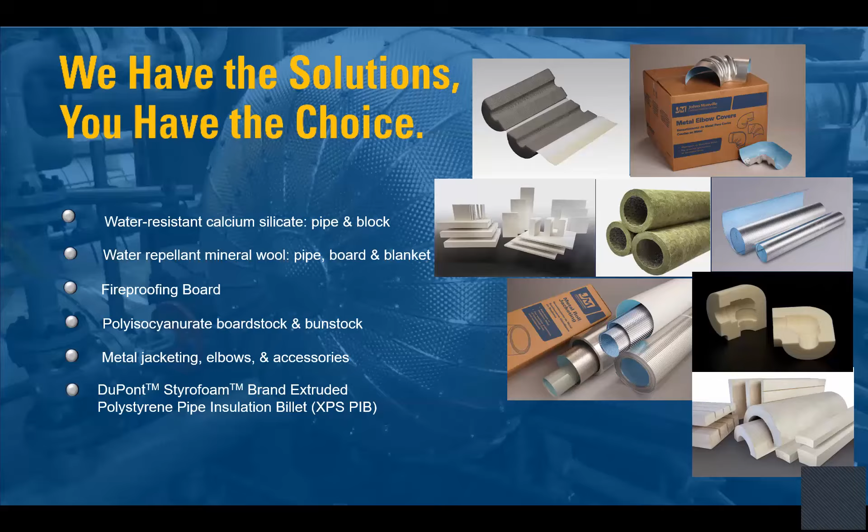So I will start the presentation right from here. At Johns Manville, we've got a multitude of insulation materials and accessories that are focused on the industrial insulation market. We're going to talk about a lot of these products as we get into the presentation today, but you can see there's a multitude of materials we offer.

And our goal is to be as big of a full line supplier to you as we possibly can. So if you look at this slide, on the left-hand column, the products are listed, and they're generic products applicable to the industrial insulation market. Johns Manville has 7 out of, I think it's 10, of them listed there that we offer to the market. So we aim to be as big of a full line supplier as we can.

Some people will ask, well, how come you just don't have calcium silicate? And the answer is, look, there is no silver bullet here. Every product has a place where it performs better in certain conditions than some of the other ones, and that's why we want to have as many as possible.

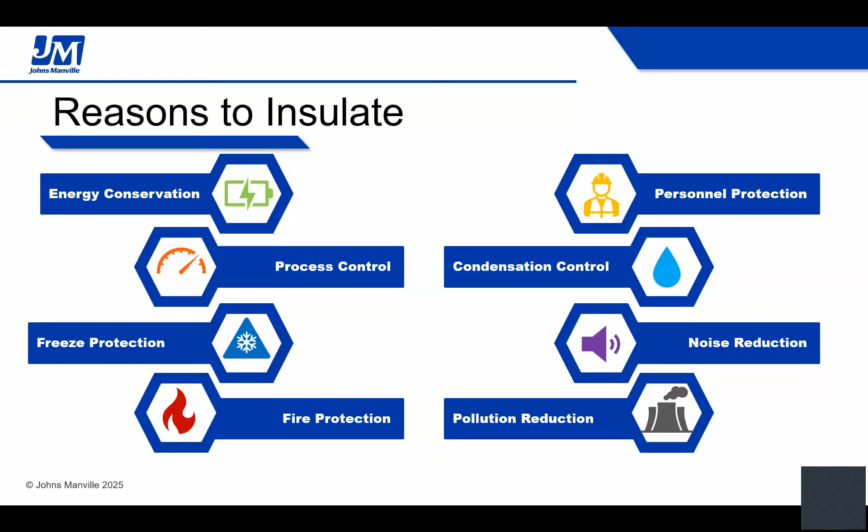So they've got to maintain tight control of their boilers and the operating temperatures to generate the products they want. That's the primary reason to insulate. A secondary one is personnel protection, and the others follow along behind it, with sustainability being a pretty close third, which is pollution reduction and energy conservation.

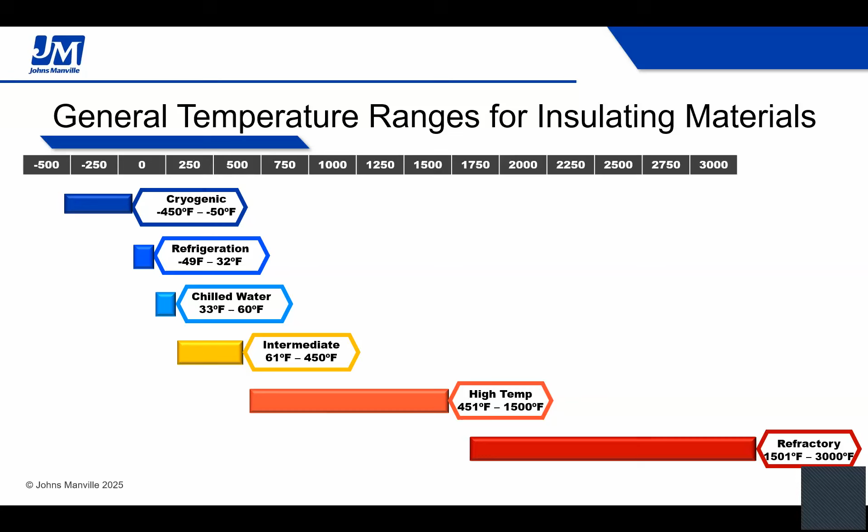This is a chart that I got out of the MICA manual. A lot of times in the business we talk about, well, these are high temperature products, this is chilled water, this is cryo. So the question is, what temperatures are we talking about here? This is a nice summary that I got out of the MICA manual, and what we're going to be talking about today is pretty much everything on here except for the refractory materials. Johns Manville's not in the refractory business.

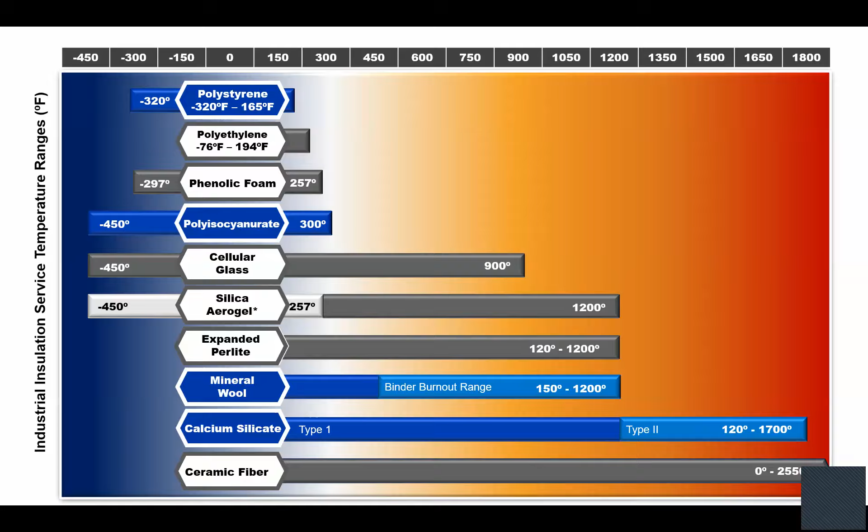This is a similar chart to that last one, except these list the products I had on one of the initial slides. Everything here in blue—polystyrene, polyisocyanurate, mineral wool, and calcium silicate—are products that JM offers. You see here the temperature ranges for all the materials. There's a lot of overlap, and one reason is some products are better suited for certain applications than others, so that's why they will all overlap. You just have to pick the best ones based on your conditions.

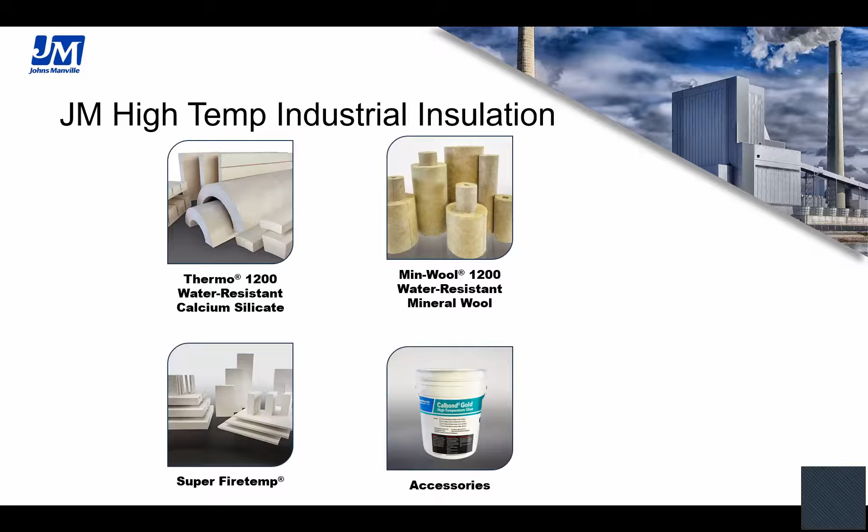So these are generally the high temperature products we have at Johns Manville. We have a calcium silicate, which is Thermo 1200, our mineral wool pipe and board products, some high temperature boards, which are Super Firetemp, and then we've got a couple of accessories that go along with the high temperature products.

We're going to talk a lot today about water resistance and hydrophobicity. So I do want to put just a brief slide here on what we're talking about and why. Corrosion under insulation is a huge issue in the industrial insulation market.

There's a lot of estimates of what it costs facilities per year, and one study found it costs $84 million annually per facility. That's on average—some are bigger with a bigger cost, and some are smaller, but on average CUI consumes about 40 to 60% of the maintenance costs.

And as a result, folks' main efforts when they design systems are keeping water out of the system. Over time, that's very hard to do—there will be some water incursion. So the next step is to make the insulation either hydrophobic or water resistant.

And what does that mean? Well, hydrophobic is kind of like water going off a duck's back, and certain insulations are hydrophobic—cellular glass, expanded perlite, and silica aerogel products are in that classification. Other materials are water resistant, which isn't hydrophobic but also isn't hygroscopic. They do resist and repel water up to a degree. Our calcium silicate and mineral wool that we offer are water resistant. But pretty much all the industrial insulation materials these days are either water resistant or hydrophobic.

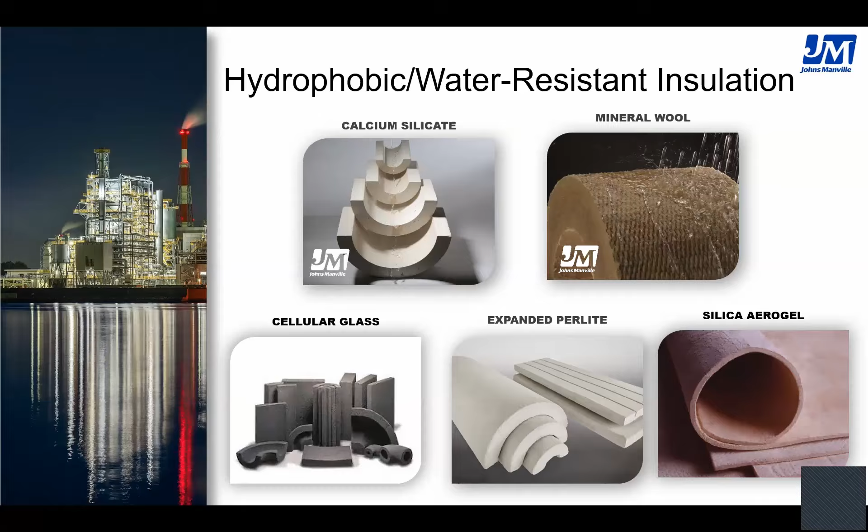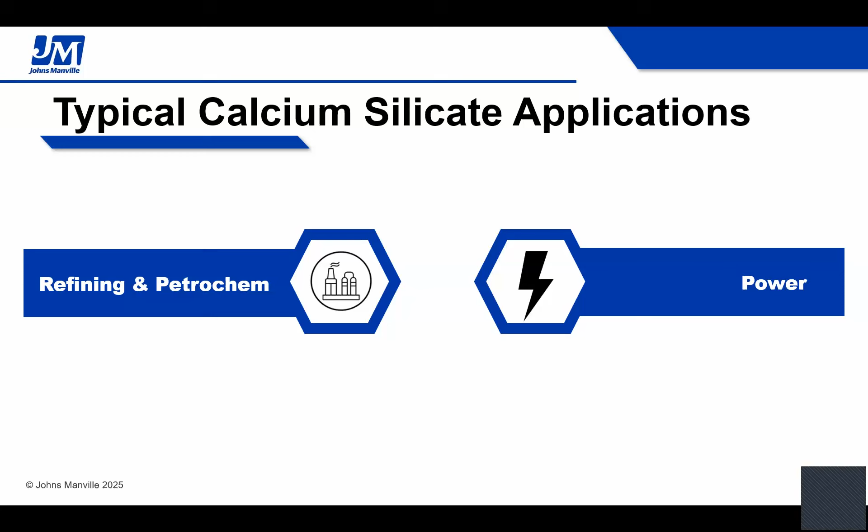So let's talk about the insulations, and we'll start with calcium silicate. Johns Manville's brand is Thermo 1200. Typical applications are refining, petrochemical, and power—our biggest markets—and we also do some in pulp and paper and a few other associated industries, but refining, petrochem, and power are our major markets.

The benefits of Thermo 1200 and calcium silicate in general: it's got a pretty decent K factor, and we're going to talk about K factors a little bit—that's the insulation value. Those of you who know more about fiberglasses or mineral wools know their thermal conductivity, or K factor, is less than .34—it might be .22, .23—and they're better insulators.

But again, we're talking at low temperatures. So calcium silicate is a much better insulator than some of those other materials I just mentioned at high temperatures, which is the application for it anyway.

Our Thermo 1200 has a corrosion inhibitor contained in the material—I'll talk about that a little bit shortly. It is water resistant. Its greatest strength, I've always said, is its compressive strength, and that's pretty much what allows it to be in applications that are—I know of some that are more than 25 years old. The maximum service temperature of all our high temperature insulations is 1200 degrees.

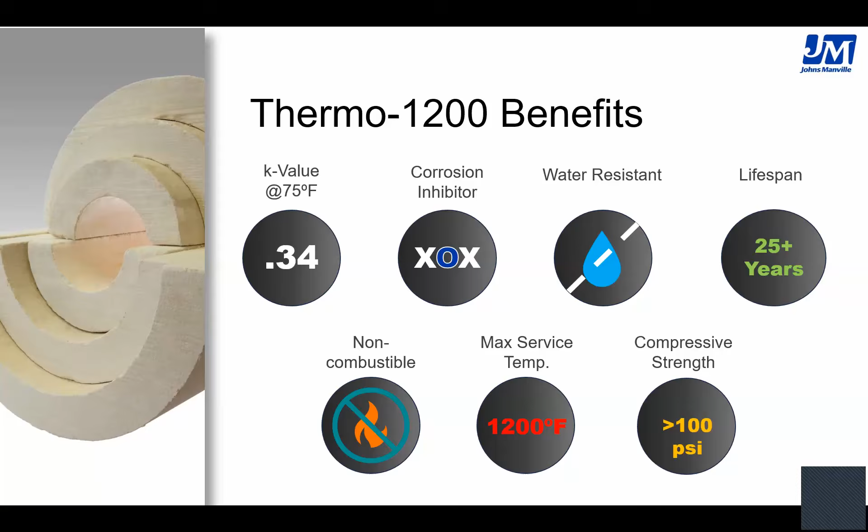So let's talk about water resistance. In 2017, Johns Manville made our calcium silicate Thermo 1200 water resistant. And what does that mean? Well, compared to before we made it water resistant, look at this chart.

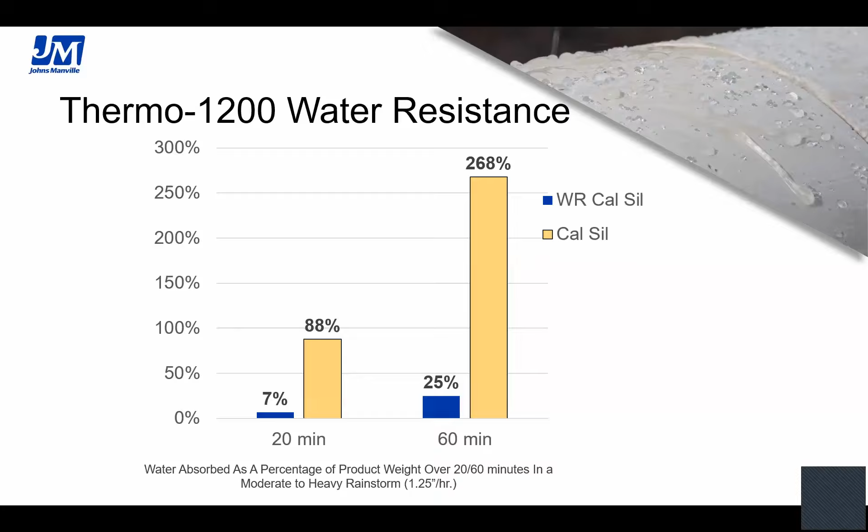The yellow or gold bar is our old one—that's Thermo-1200—and it was not water resistant. You can see in a 20-minute rainstorm, it would absorb as a percentage of product weight 88% of that moisture, versus now that we've made it water resistant, in a 20-minute rainstorm it would absorb 7%. So the old stuff absorbed water very easily. Water resistance became important for CUI reasons, and also contractors like the fact that it's water resistant because it gives them more time to install the jacketing.

However, sometimes when that vessel gets really big, those V's don't close. So what do we do? We've got 3 alternatives for a tighter fit on large diameter vessels: what we call beveled lags, curved segments, and curved radius block.

I'm going to talk about curved segs and curved radius block first. Those are cut to fit the actual diameter or circumference of whether it's a vessel or a large diameter pipe, and the sides are angled to fit tightly against each other, so it does away with those V's that might not close. We have 2 versions, one's 6 inches wide, one's 12. They're the same product, just one's wider than the other, which results in less labor.

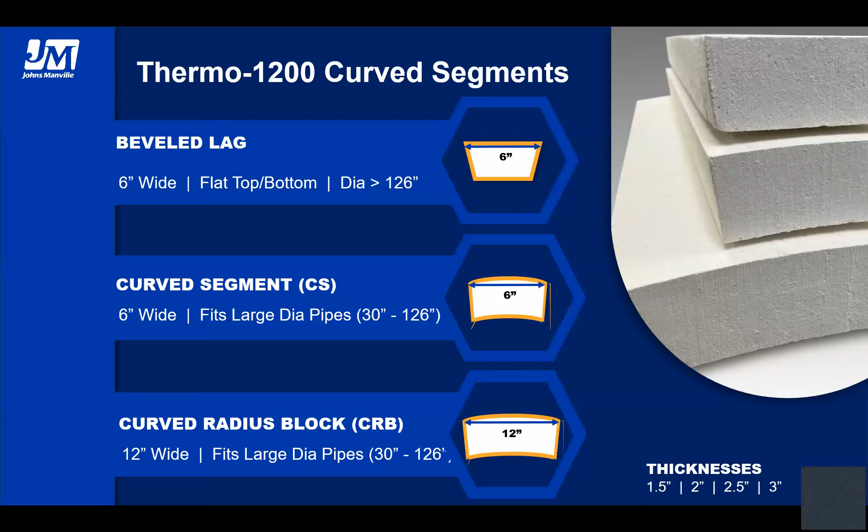Going to bevel lags, at some point that vessel surface might get so large of a diameter that you don't need to cut a curve in the block. So we offer beveled lags where there's an angle cut on the sides, but the flat part on the inside fits very tightly against the vessel because the diameter is so big. You end up with a nice tight fit with either one of these options, fitting snugly to the vessel surface as well as closing up the joints very well.

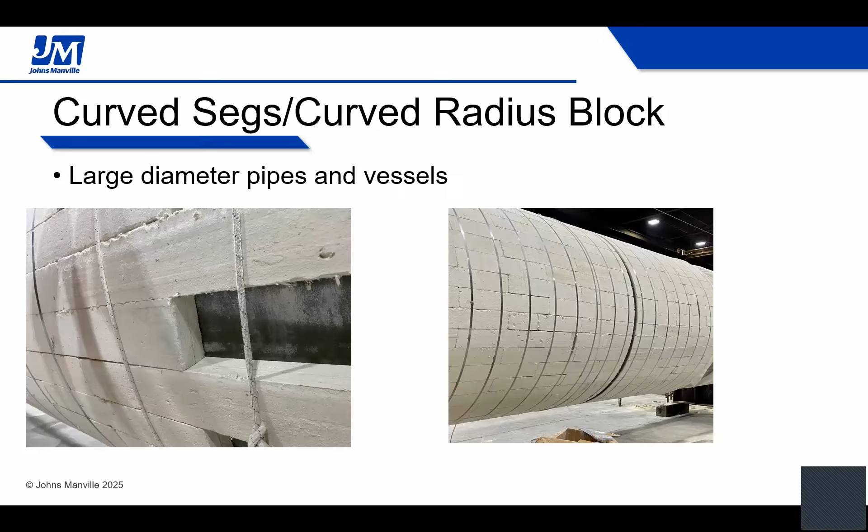A couple things to think about with calcium silicate: there are various options and you can select a lot of different materials, but it's really up to the owner or the specifier to qualify the materials. That means meeting the ASTM requirements and other testing requirements that the owner might have prior to selecting the material.

We also have a corrosion inhibitor in the insulation calcium silicate we make today. That corrosion inhibitor was put in in 2002. I'll talk a little bit about that next, but just be aware that there is a corrosion inhibitor that actually works in our product.

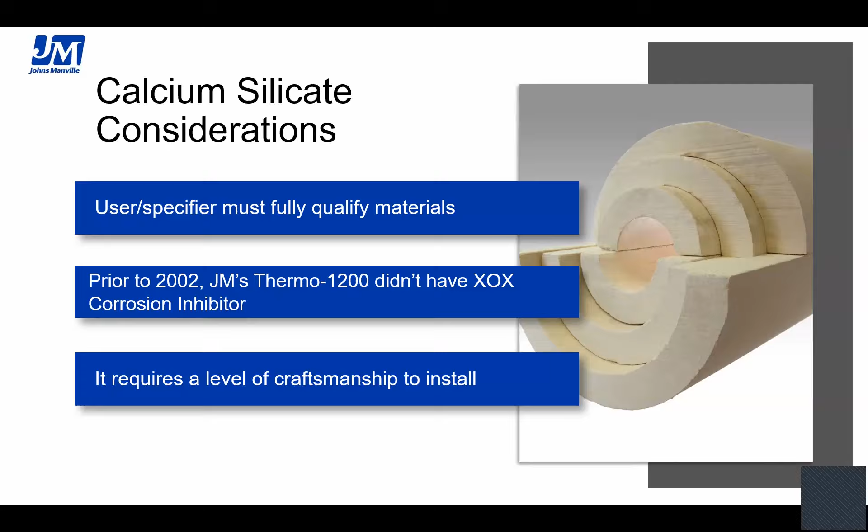CalSil requires a higher level of craftsmanship to install. It's a cementitious product, so cuts have to be pretty accurate. It's easier with mineral wool because it's a fibrous product, so if the cut's not accurate, you can pretty much push it up against the nozzle or the valve stem and band it on, and you're good to go. With calcium silicate, you can't do that because it's cementitious, so it requires a little more skill level on the part of the contractor.

Getting back to that corrosion inhibitor, ours is called XOX. You see it quite often today that pipes are painted or coated before insulation is applied, and one of the reasons folks do that is to keep moisture off the surface of the pipe. When moisture contacts the surface is when corrosion can happen. The XOX actually provides a protective coating to the pipe, similar to and performing the same way as painting the pipe or putting some other coating on it, but this is contained in the material itself.

95% of our chemistry includes a blend of at least 4 different corrosion inhibiting ions. It keeps the pH level around 10, well above the acidic level where corrosion can occur at less than 7. Those corrosion inhibiting properties are there for the life of the system; they don't leach out over time. They're actually activated when water is present, so it's a water-activated solution. If there's no water there, you don't need corrosion inhibitors, but once water enters the system, the chemistry coats the pipe as the water gets to it, keeping the water off the pipe.

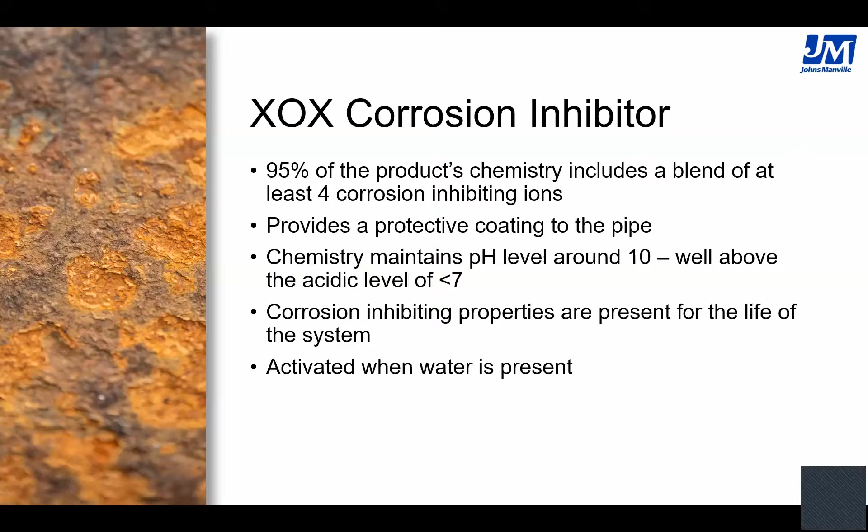Another term for the protective coating is a buffering effect, and it maintains the pH at a high enough level to help inhibit the corrosion.

We also have some heavier duty calcium silicate boards. Our brand names are Super CalTemp Gold 1700 and Super Firetemp. The 1700 degree block is produced in the forms you see here, flat block and also scored, just like our regular Thermo-1200 calcium silicate, except it's good for applications up to 1700 degrees Fahrenheit. We'll talk about where this is used on the next slide, but I also want to mention Super Firetemp, which are higher density boards used for pipe saddles, pipe supports, and various other applications, with service temperatures up to 1800 degrees Fahrenheit.

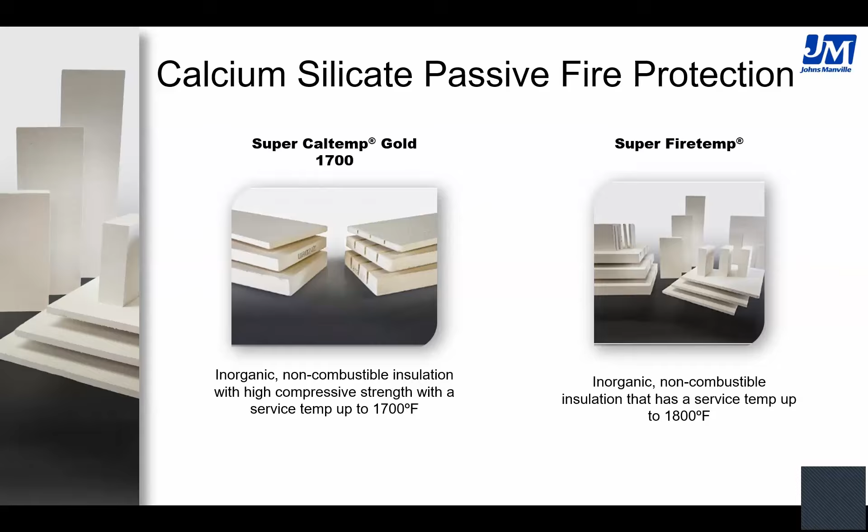Primary applications for both materials, the Super CalTemp and the Fire Temp, is they provide a 2-hour rating for UL 1709 as passive fire protection. For those unfamiliar with 1709, that's a hydrocarbon pool fire where the temperature goes from 0 to 2000 degrees in 5 minutes, and the insulation has to perform for 2 hours or 120 minutes. These are primary applications for both the Super CalTemp Gold and Super Firetemp products.

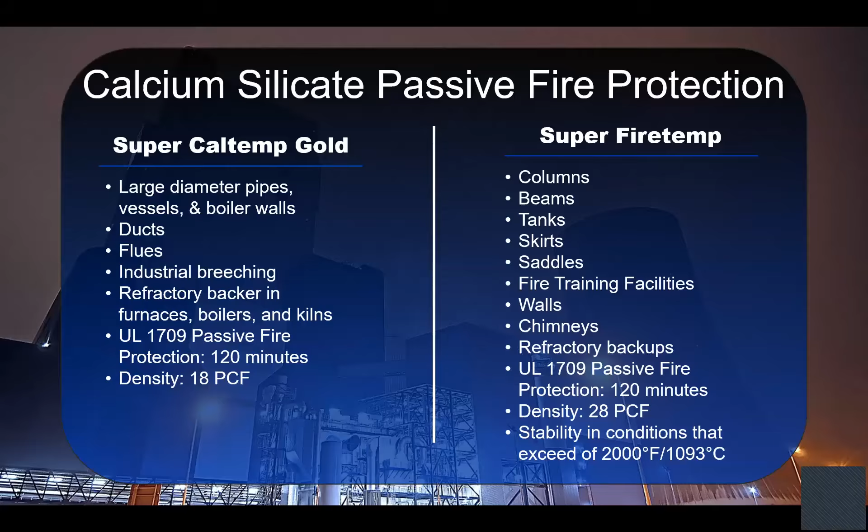One application we're seeing more of these days with Super Firetemp is fire training facilities, due to its fire protective properties. We published a technical bulletin last month about that application. This is a burn building where you can see the walls and ceiling are lined with our Super Firetemp board, used to train firefighters.

They'll throw a couch, a bed, whatever it is in there to simulate a room, then set it on fire, and send the fire department in to put the fire out. It's designed to be reused. There are instances where panels on the walls haven't been replaced for 7 to 10 years through multiple training classes.

Now I want to move to mineral wool, which is a fibrous product. Some of the benefits - notice the K factor. The K value at 75 degrees for CalSil was 0.34, this is 0.22. K values I look at like golf scores, the lower the better. So based on this, at certain temperatures, mineral wool is going to be a much better insulator than calcium silicate.

The other big advantage is acoustics, and we see a lot of specifications calling for mineral wool for insulation and acoustics. It's also easier to install, like I mentioned with CalSil, because it's a fibrous product. It's one of the lower cost options, labor and materials, that you can find on the market today.

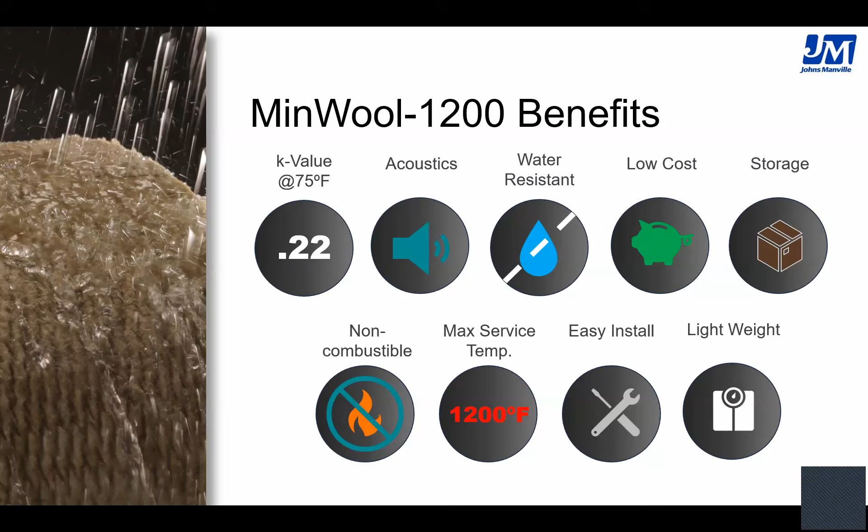In addition to pipe insulation, we make boards. Our industrial boards range from densities of 4 pounds up to 10 pounds per cubic foot, and those boards are rigid, primarily used on flat ducts and large diameter vessels. But we also make the same type of boards, same densities, in a flexible form which we call batts - they wrap easier than a rigid board around cylindrical ducts, turbines, and larger diameter vessels.

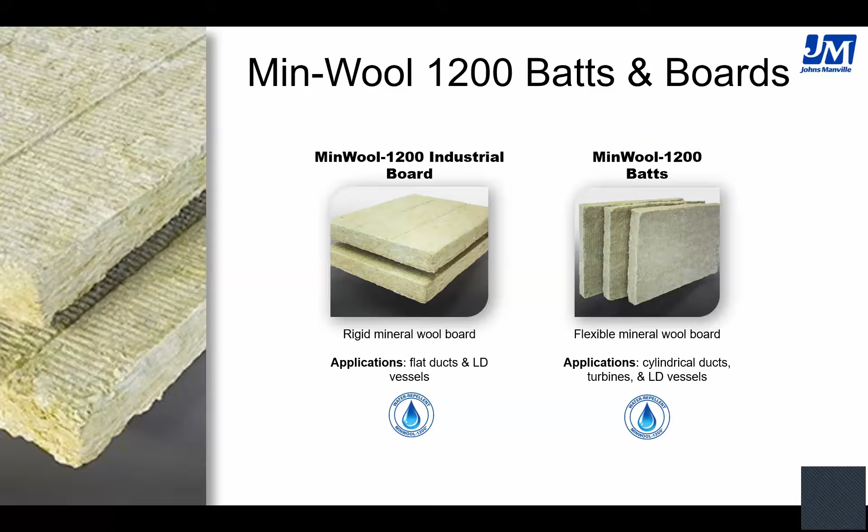All of our mineral wool insulations, whether pipe or board materials, are water repellent.

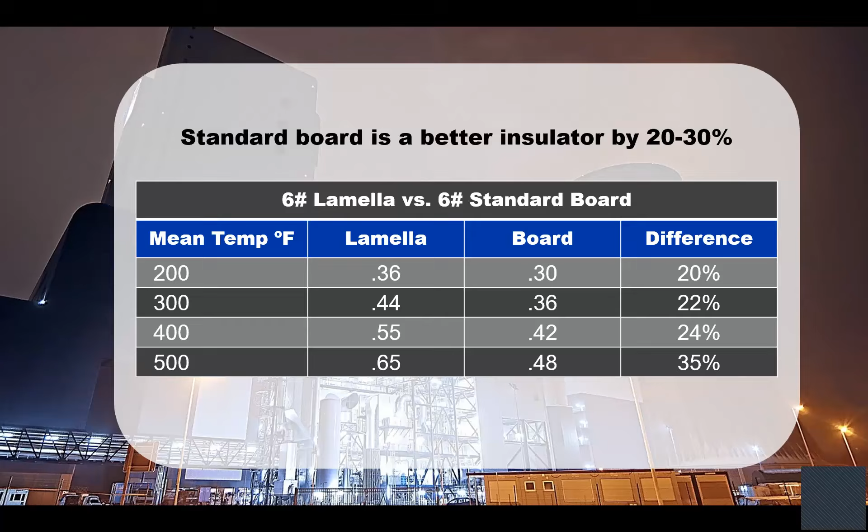The interesting thing is both of these products might be made out of 6-pound density material, but simply due to fiber orientation, the thermal conductivity, the K factor, the insulation value - however you want to look at it - is different, primarily due to the orientation of the fibers. Fibers that are parallel to the surface insulate better, providing a more difficult path for heat to move through the material versus perpendicularly set fibers.

So with mineral wool, you hear a lot about binder burnout. What's that all about? Well, binder is an additive that holds the fibers together, it gives them their loft. In mineral wool and other fibrous materials, that binder is an organic material.

It begins to oxidize or burn out at about 450 degrees Fahrenheit. You can see in the picture at the top, the gray part is where the binder is oxidized, the brown part is where it's beginning to oxidize, and on the surface where it's cooler, the binder's still fully there and intact, doing what it's supposed to do. The good news is the binder doesn't impact its insulation value at all.

But without the binder, the compressive strength is compromised. Again, the binder is what holds the fibers together, so if the binder's not there, the fibers are still there unless you've got a bunch of vibration, which will cause the fibers to move and settle at the bottom. Gravity always wins.

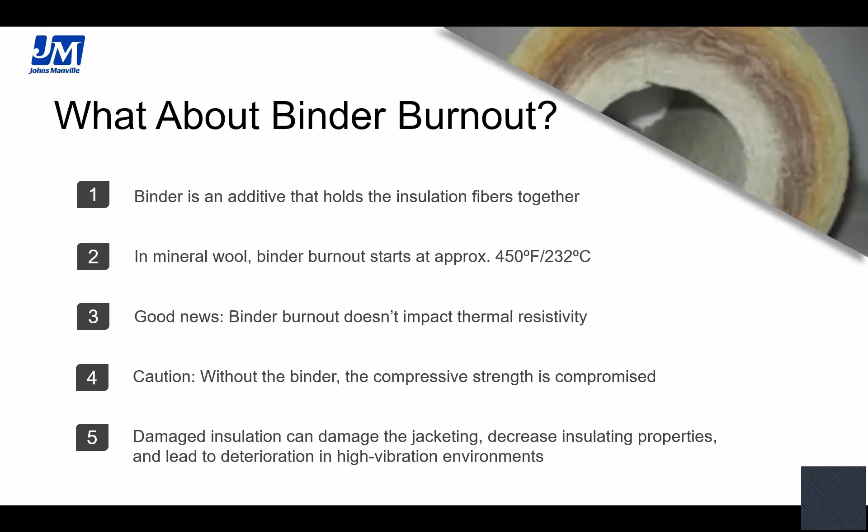Mineral wool is a softer product. It's spongy, and without the binder, it's even more spongy. So it's more likely to be damaged if it's not treated carefully. When you damage it, the compressive strength suffers. So now that 2 inches might now be 1.5 inches, and your thermal conductivities are different. Your insulation value is different, and not in a good way.

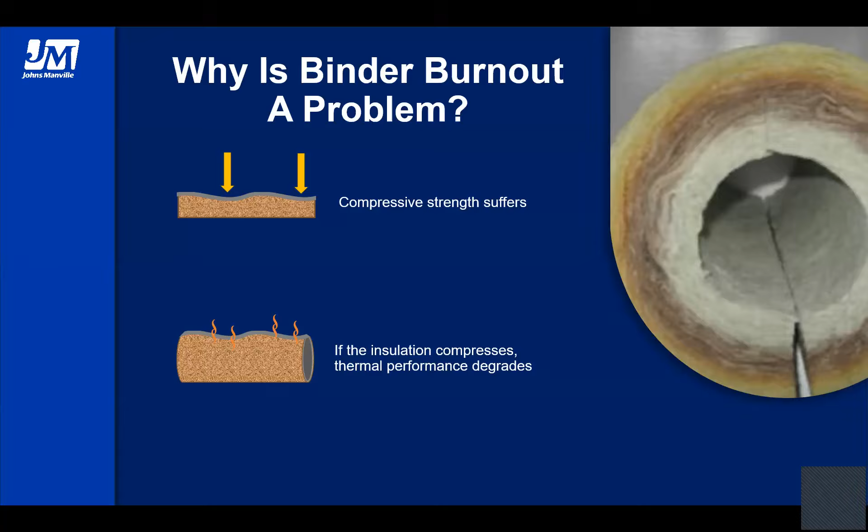So some things to consider when you're looking at choosing mineral wool: it does have a lower compressive strength. So if there's physical abuse, people are going to be walking on the insulation, which you're not supposed to do, but we all know it happens. A higher compressive strength like calcium silicate would be the better choice. The K factor is pretty low, but above temperatures of 500 degrees Fahrenheit, calcium silicate actually becomes a better insulator. The K value curves cross.

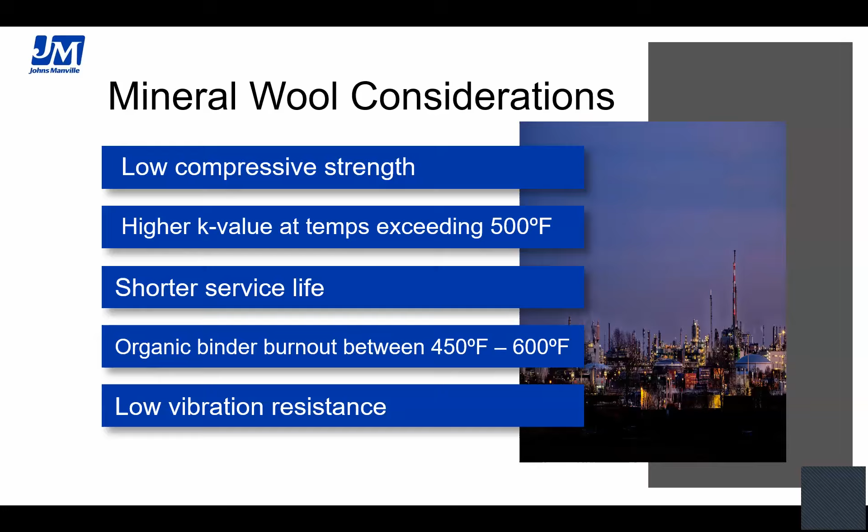Mineral wool has a shorter service life in general, just due to the low compressive strength. Any damage to the jackets will now allow water to get into the system, and now you have the higher potential of corrosion. And just fibrous products in general have a low vibration resistance over time.

Gravity also always wins. And finally, we offer two different high temperature accessories. One of them is the CalCoat 127. It comes in 40-pound bags. You mix it with water and trowel it onto the pipe insulation where there is a chip, a damage, or the seams don't meet exactly right. You fill in voids with this product.

In addition, we have Calbon Gold, which is a sodium silicate-based adhesive, used to glue broken pieces together, but also for gluing the miters that are cut for elbows to each other and other large sections or special shapes. And it dries very hard, so if you drip it on the floor when you're doing this and you don't clean it up, you're going to have to chip it up later.

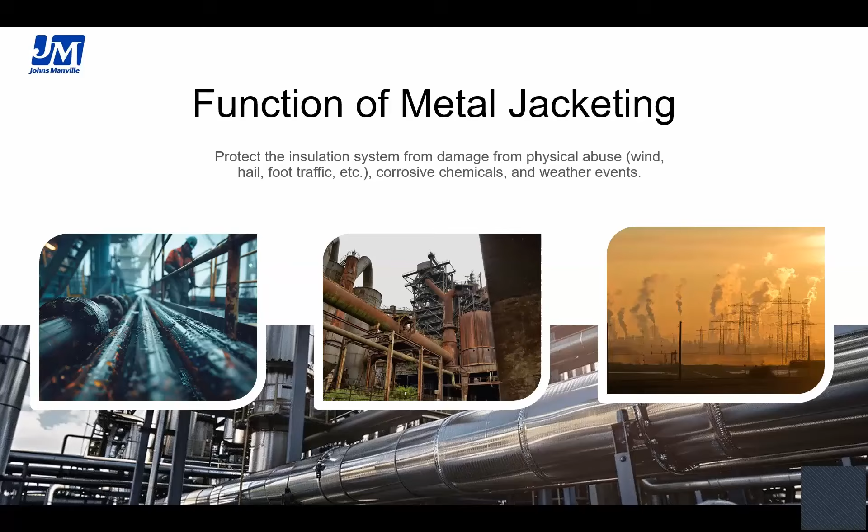I think we have a picture somewhere of a mama bear and her cubs choosing to walk on an oil pipe instead of on the ground for easier walking. So it's not a matter of if your pipe is going to get damaged, it's more of a matter of when, unfortunately. The secondary function of metal jacketing is to reduce water infiltration into your system.

To help facilitate this, the longitudinal joints on horizontal pipe need to be located at about the 3 or 9 position on the pipe. And all joints on pipe and tank insulation should be oriented to either naturally shed water or face away from prevailing winds. Another step to keep out liquid water is to seal the metal jacketing joints with flashing sealant applied inside or on the outer lip of the joints.

This is a little controversial. Some people think it helps keep water out of the system, while some people think that it prevents or slows the evaporation of water that is already inside the system. There's not really one that's proven right scientifically. Our opinion at JM is that sealing of metal jacketing joints is probably beneficial. We recommend doing this, but it is a mild recommendation and not something that absolutely must be done. The ultimate decision on this is up to the specifier of the insulation system.

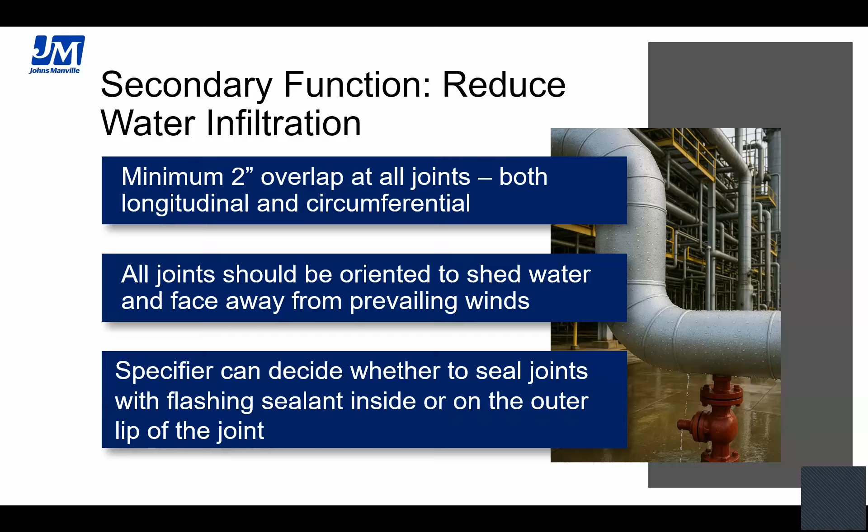Outside of North America, there's a lot of coated steel used in that market, such as Galvalume, galvanized and aluminized steel. But these are really rare in North America. In our geography, aluminum is used most of the time for metal jacketing. It is cheaper, easier to handle, install, and fabricate, and it's safer since the edges aren't as sharp as with stainless steel.

We strongly recommend that all metal jacketing have a 3-layer, 3 mil thick factory heat laminated polyfilm moisture barrier on the interior surface. That helps prevent corrosion on the hidden interior surface of the metal jacketing. I'll get into that in a few slides.

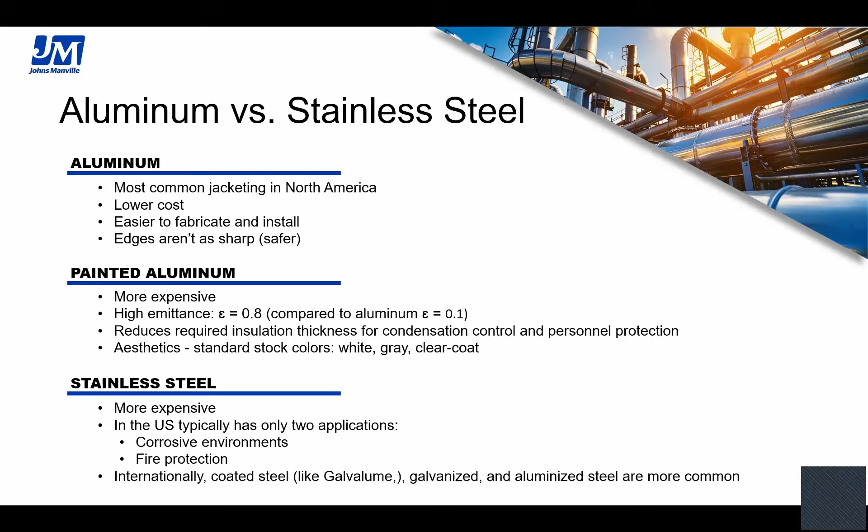Just to note, the aluminum ASTM is C1729 and stainless steel is ASTM C1767. Those are differentiated based on rigid versus non-rigid insulations.

So here is our metal jacketing accessories, all shown above. We do have crossflow jacketing, which I will get into. We have a series of other jacketing facers, such as stainless steel, aluminum, and painted aluminum, and elbow fittings.

We note that our aluminum elbows have that polyfilm moisture barrier applied on the interior surface, where our stainless steel elbows do not. It's not a matter of if we can, it's just not a necessary need in the market.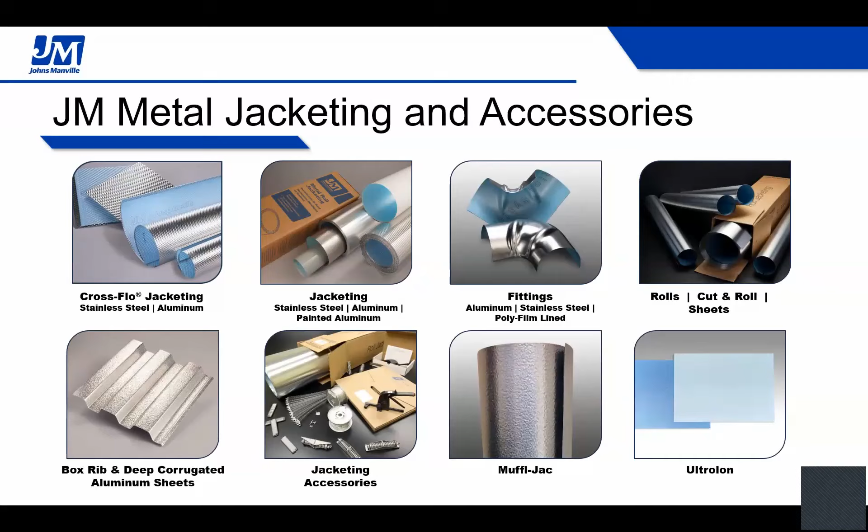And then we have rolls that are both available in sheets and cut and roll. We have corrugated metal accessories to go along with those, some acoustical products, as well as others available online.

So let's get into the topic of moisture barriers that I just mentioned. We have a polyfilm moisture barrier factory heat laminated to the inside surface of our metal. It's to reduce the likelihood of corrosion, so it would actually be more accurately called a corrosion barrier, but we've all settled on the name moisture barrier, so that's what we're going to call it.

Vapor retarders used on the outside of the insulation are sometimes improperly called moisture barriers, but we don't recommend using that. This inhibits corrosion when water or water vapor can enter the insulation and exist between the insulation and the jacketing. In hot applications it's between the vapor retarder and the jacketing, and in cold applications the water can cause pitting or crevice corrosion on that interior surface of both aluminum and stainless steel jacketing. There's also another type of corrosion called galvanic, which you also want to prevent.

For all these reasons, we strongly recommend the use of polyfilm moisture barrier, or shortened to PFMB, on our metal jacketing where it is available. It is not a proprietary product. A lot of manufacturers use this; it just comes in different colors, etc.

All right, so here's the performance of 3 different types of moisture barriers on some of the key properties and testings that have been performed in the past. The 3 types of moisture barrier are paint, polykraft, and polyfilm.

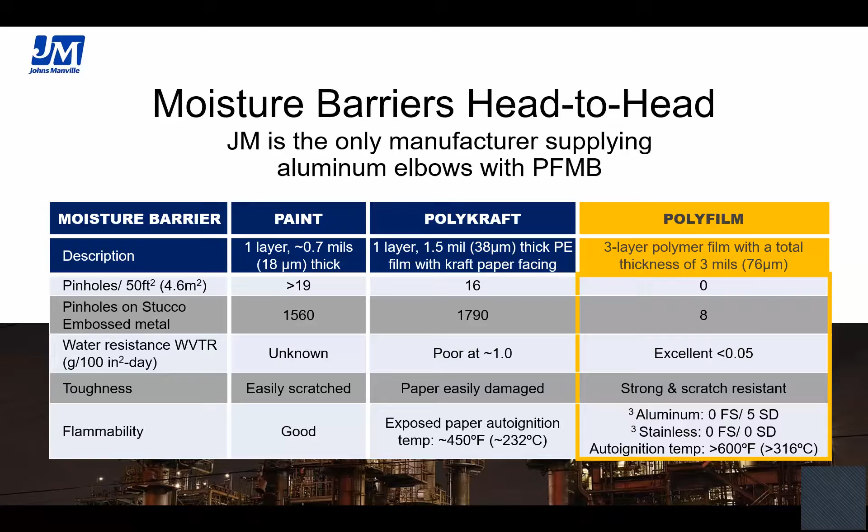All right, so now we're going to move into our pressed metal elbows. Metal elbows are the jacketing portion that goes over the insulated elbows in piping systems. We produce these jacketing elbows in 2 metals, aluminum and stainless steel.

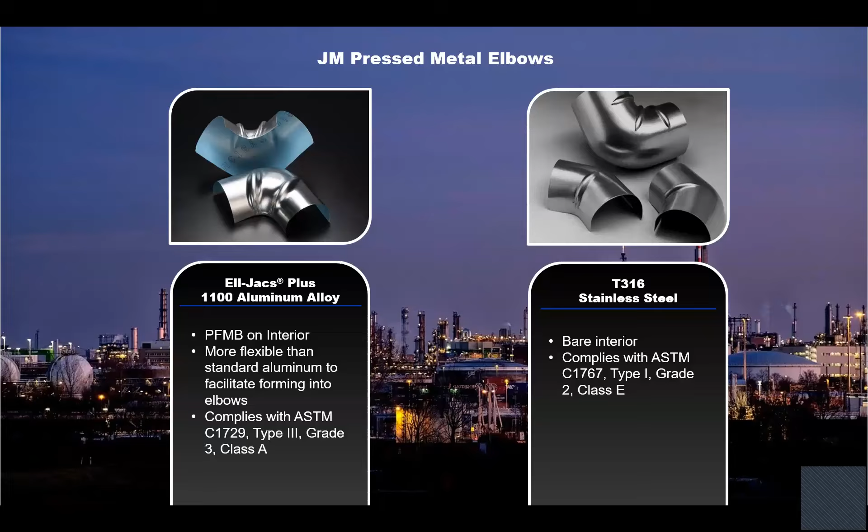Our aluminum comes in 1100 alloy with that PFMB on the interior. Our stainless steel comes in T316 alloy, which offers a higher corrosion resistance, and they have the bare interior and exterior. Both of these comply with their associated ASTM requirements.

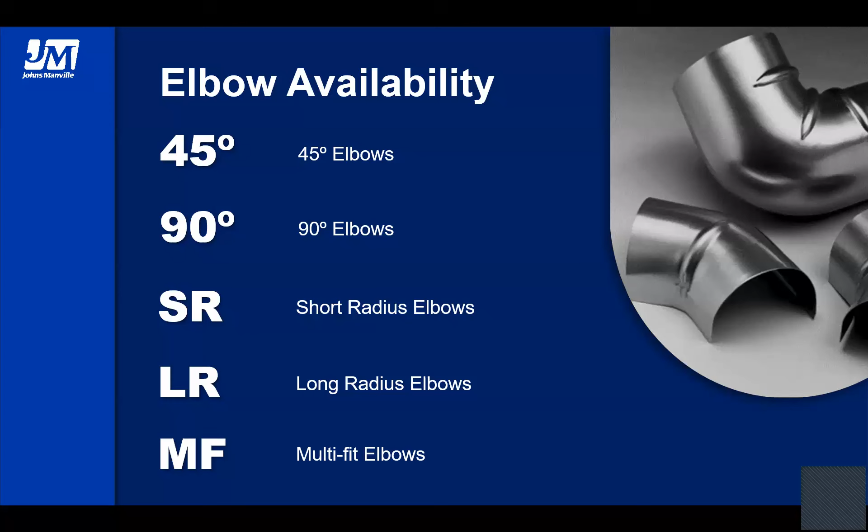This is our slide simply showing the availability of the elbows we offer. We offer in 45 and 90 degrees, short and long radius, and what we call multi-fit.

Our pressed metal elbows are designed to fit over a 2-piece preformed elbow installation that's sized to comply with ASTM C450 and C585. The target overlap at the longitudinal joint of the elbows is 5/8 inches at each of the 2 joints, and it can go as low as 5/16, but we don't necessarily recommend allowing the overlap to go any lower than this. The target for the butt joint overlap with adjacent straight pipe jacketing is 5/8 inches.

The pressed metal elbows are secured with screws, rivets, or bands, but only on cold pipe. Bands are the only item that should be used, I'll explain that again later. When you have screws and rivets on cold insulation, you're going to rupture that vapor barrier underneath and render it obsolete immediately. We do have a number of documents on the installation of our pressed metal elbows available online.

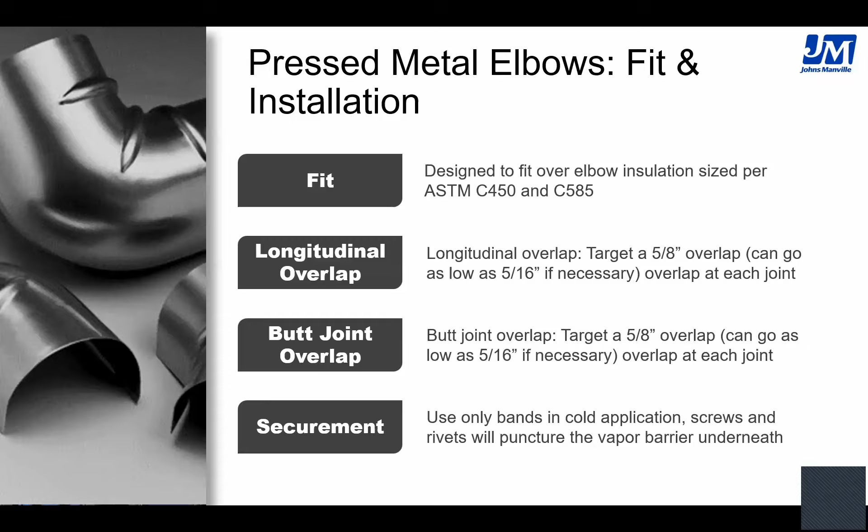So let's talk about sizing. Our pressed metal elbow jacketing sizes are identified by a numerical designation from 1 to 56, and then Q1 to Q9 for our larger 4-piece elbows, which we call quads. The numbers are specific to each elbow type and metal type, so like a 45 aluminum, a 90 stainless, and so forth.

These numbers don't indicate size though. They are literally based off of the models that we pressed the pipes on, or the molds. So they're just a numerical name assignment to each elbow. The larger numbered elbows are usually, but not always, a larger size. For example, an 18 aluminum 90 is larger than a 10, and a 44 is larger than a 39. But there are exceptions. The person selecting the elbows must always refer to the sizing tables. I'll show you an example of this here.

So what I meant on the previous slide, we're going to show through a visual aid using our 90-degree long radius sizing chart. If the number elbow specified in our table does not fit, it is not correct to simply use a size that is one number larger. In this case, we have a 21, and if that 21 doesn't fit, you're not just going to jump to a 22.

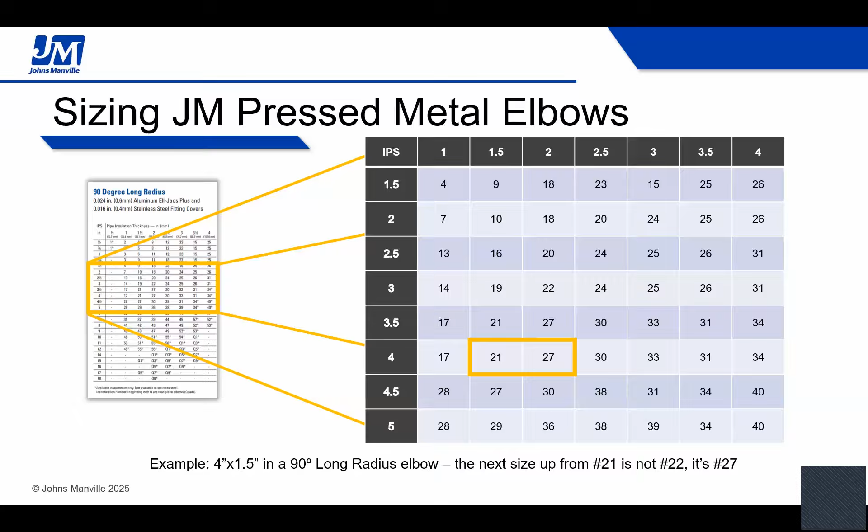Instead, looking at this table, the next larger size will be one cell to the right. So in this case, when our 21 doesn't fit, you're actually going to pick a 27. That throws some people off, but if there's any confusion or questions, our customer service team are experts in doing this, so just give us a call. We do this stuff all the time, so don't sweat it.

Now we're going to move on to our painted aluminum jacketing products. We can provide our aluminum jacketing with paint on the exterior surface. Our stainless steel jacketing is not routinely painted.

The painted aluminum provides 3 benefits. It changes the appearance for aesthetic appearances, and some end users find the product more aesthetically pleasing. It also increases the emittance from 0.1 to 0.5 and 0.8, depending if it's clear paint or pigmented. That is important because essentially emittance reduces the required insulation thickness for condensation control and personnel protection design criteria where jacket surface temperature is critical.

We also offer improved corrosion resistance compared to bare metal. It's still not as corrosion resistant as T304 stainless, but painted aluminum will approach this performance, so it is a step up from bare aluminum.

Here at JM, we offer 2 standard paint colors, white and gray. We do have additional colors based on request. For example, we do have a lot of jobs with Bureau of Land Management where they will want a forest green or a sand color, and that helps those pipes blend into the environment where people don't want the pipes as obvious outside.

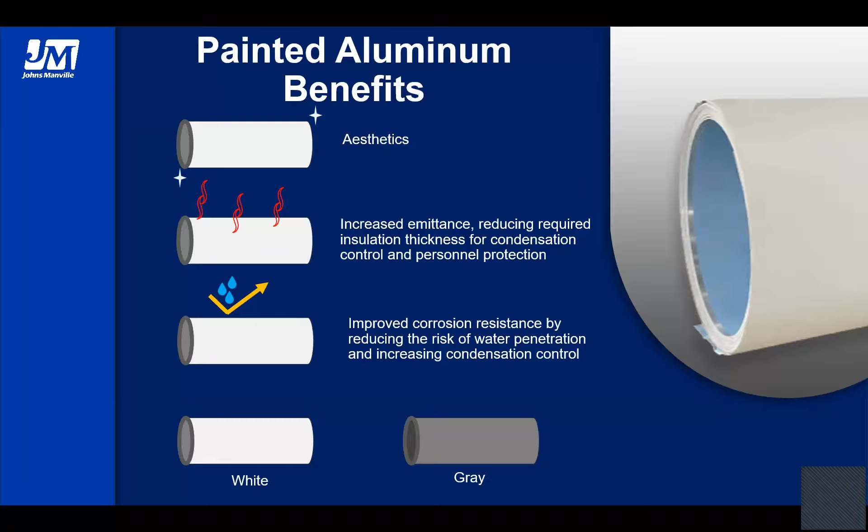Moving right along, we have profiled metal sheets. We offer 2: one is box rib and the other is deep corrugated. Box rib is obviously a steeper, more angled corrugation, and then we have our deep corrugated, which is that more traditional look. The important note on these is you're not going to put these horizontally because water will pool in those ribs and cause corrosion. So these are for vertical application on large tanks and vessels.

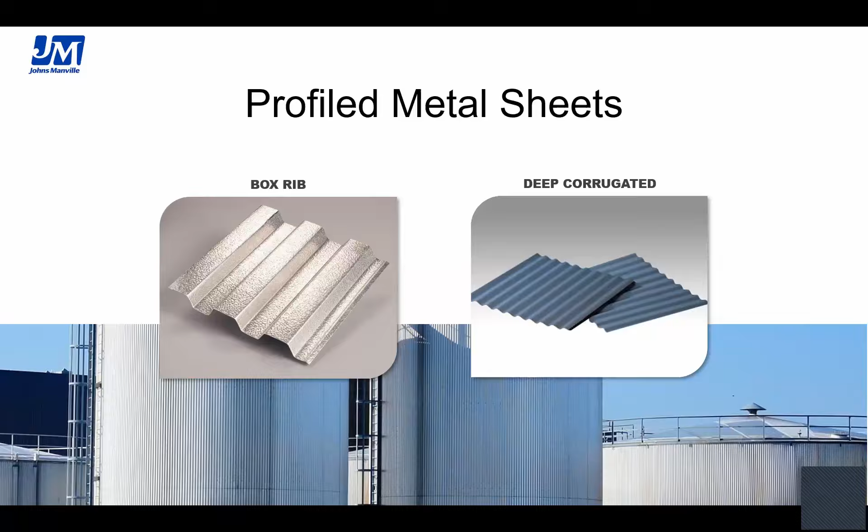For time's sake, I'm not going to go through all of this in detail, but box rib we offer in aluminum and stainless steel, typically in a stucco embossed pattern. Our deep corrugated is offered in smooth, stucco embossed, and painted. It has that PFMB on one surface. Both of these are for vertical cylinders, never horizontal.

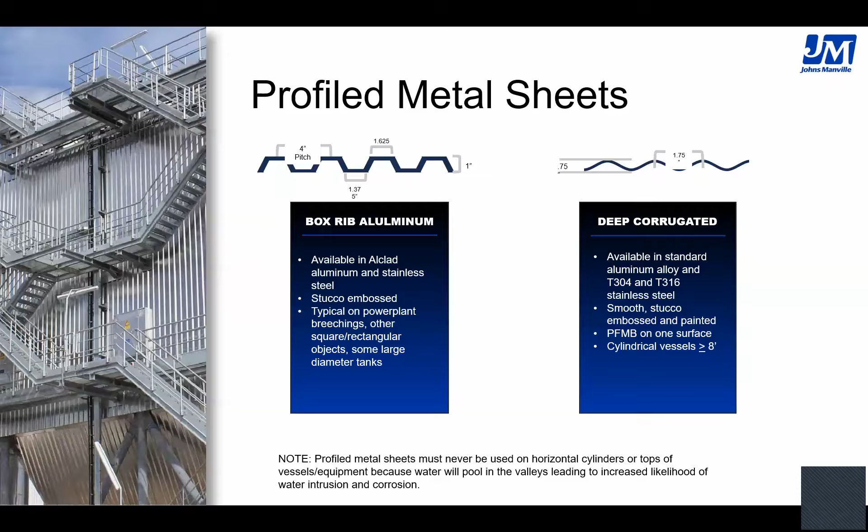The other one is muffle jack, which is an 020 stucco embossed aluminum laminated with that 1 pound mass loaded vinyl. That is protective jacketing and an acoustical benefit in one go. It's installed just like regular metal jacketing and has the same dimensions.

Going into our accessories, we have a myriad of offerings here, both aluminum and stainless steel banding in 2 sizes. We do typically recommend stainless steel banding as aluminum is a little weaker and can snap and break. It is offered in rolls and pre-cut lengths.

We offer a variety of fasteners. Again, on cold applications, only banding should be used to secure the jacketing, not those screws or rivets like I mentioned. We do offer tie wire to secure insulation in place, mostly in hot applications, and springs to help maintain tension on banding around tanks and very large pipe as the tank and insulation system undergo expansion and contraction.

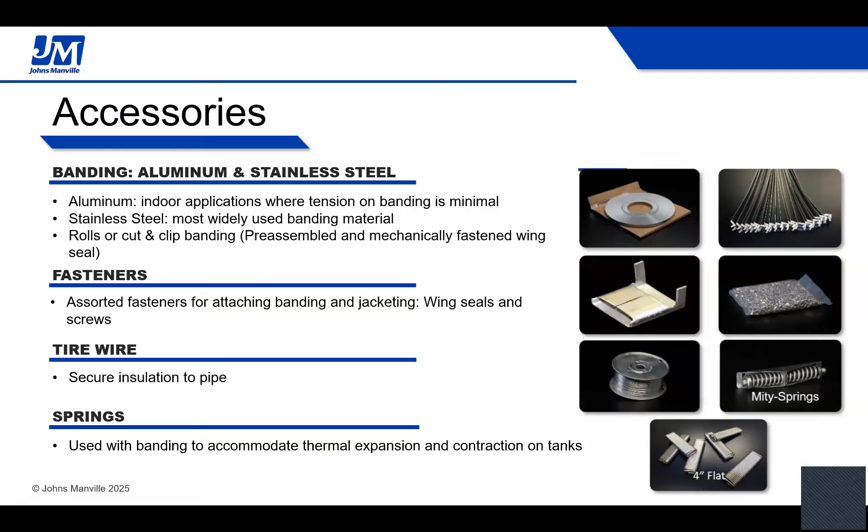So now we're going to get into our most recent innovation. It was launched a few years ago. It's called Cross-Flo metal jacketing. I know I'm going fast—I really appreciate your guys' participation here.

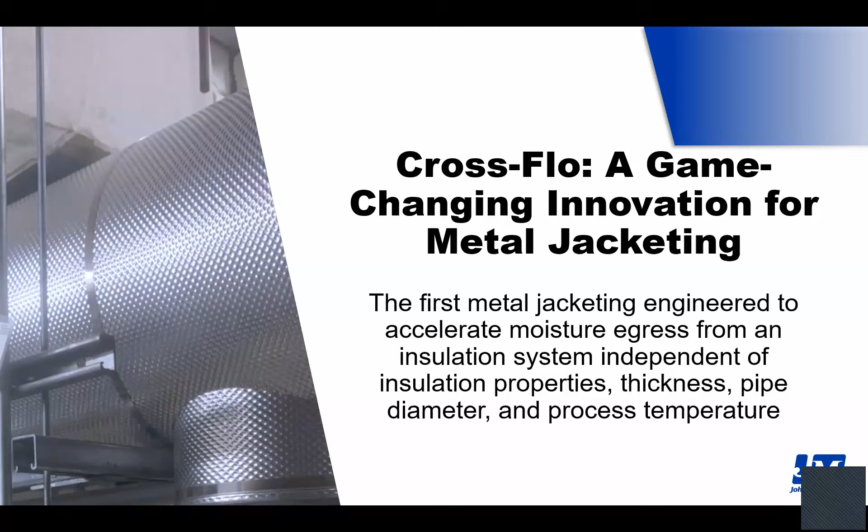So the first metal jacketing is engineered to accelerate moisture egress from an insulation system independent of insulation property, thickness, pipe diameter, and process temperature. That's important for reasons I'll get into right now.

So Jack mentioned CUI, or corrosion under insulation. When you heat up your pipe, you're going to have heat driven from your pipe through your insulation outside. During construction and temporary shutdowns, it might be necessary for insulated equipment to be idle, and when that happens, the pipe system is going to cool down. Moisture can enter the system if it's condensated on the outside, and it can go through if it's not installed properly, traveling through that insulation and sitting on that pipe.

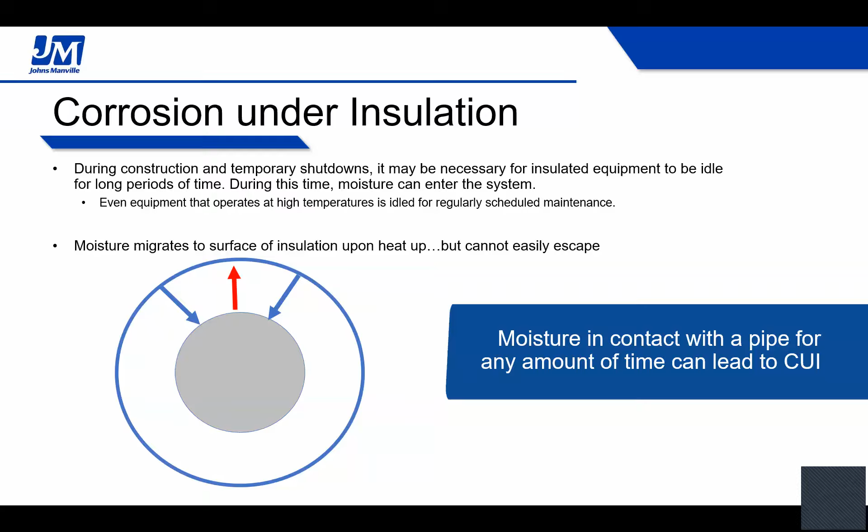And then when you heat up that pipe back upon heat up, it's going to kick that water back out, making this cyclical pattern where you just have water going in and out of your insulation, and eventually it will render that insulation useless. This is a really important topic to address, because to repair it is egregiously expensive and hugely laborious. As much as you can mitigate this, you want to—it's just a really costly labor practice to do.

So the way you can do this is through all of these methodologies. You want to have a properly designed and installed system. You can use pipe coatings. Like Jack mentioned, you have those hydrophobic and water-resistant insulations. You want to do maintenance, inspection, and repairs. You can add corrosion inhibitors like our XOX. And you want to provide a path for water egress to get out. But chasing just one of these is not going to complete this goal—there's no silver bullet. You want to use all of these in conjunction to help your goal of mitigating CUI.

I'm not going to go into more detail on this because it's so complex—we could talk about it forever. But we do have lunch and learns, and we have a ton of webinars on these topics, so please check it out online.

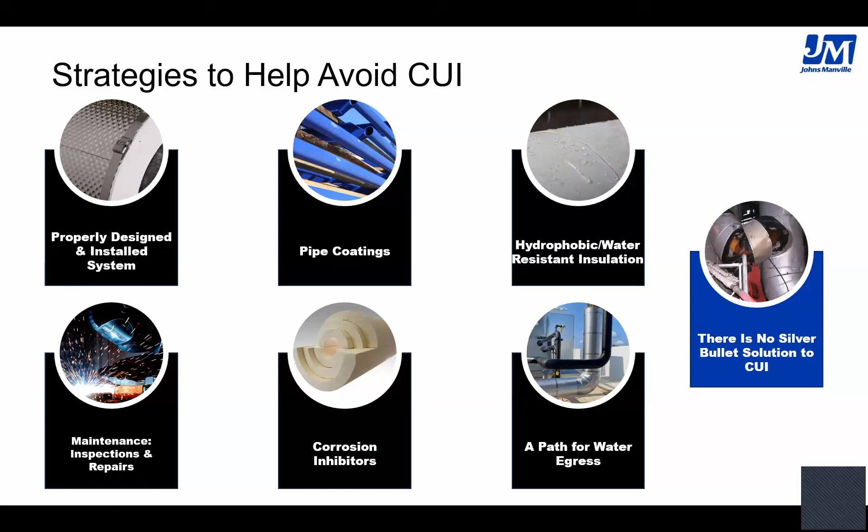So what is Cross-Flo? Cross-Flo is our metal jacketing with a diamond-shaped embossing pattern on the jacketing. That pattern actually faces inward to provide a pathway for water to travel if necessary. It comes in stainless steel and aluminum, and it comes standard with that moisture barrier on the inside.

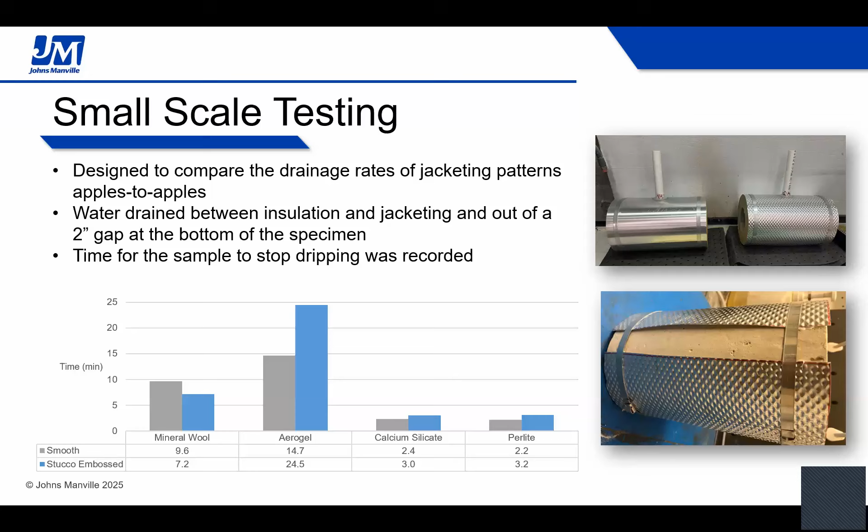So let's look at some of the testing we did. To compare the drainage performance of different jacketing patterns, we essentially made mini models. We used 4 types of insulation under 3 types of metal jacketing: smooth, stucco embossed, and Cross-Flo. We forced water into the system through these sealed PVC pipes, and then timed the rate at which the water left, recording the time for the sample to stop dripping. So these are the first 2 results of stucco and smooth—as you can see, depending on which one, we have mineral with smooth, and so on and so forth. Here's the time for them to stop dripping.

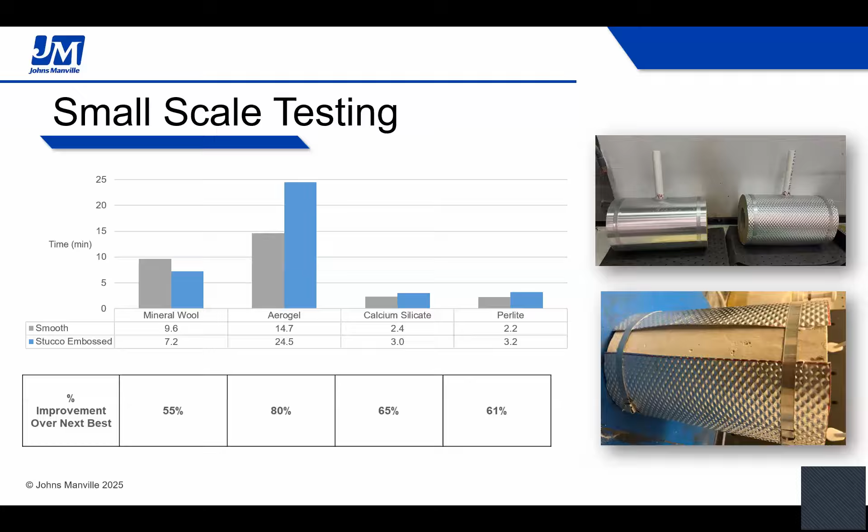Now here's the results with Cross-Flo included. These results show the percentage improvement over the next best result. So this means Cross-Flo is 55% better than stucco embossed over mineral wool, 80% faster than aerogel covered by smooth, 65% faster than smooth over calcium silicate, and 61% faster than smooth over perlite. So you can tell it really gets that water out of there as fast as it can.

Here's another test we did, hot pipe testing in our facility at Littleton. What we did is we took insulation and forced it to take on water. We physically submerged it for hours till it was fully saturated, wrapped it around the pipe, put Cross-Flo over it, heated it up, had a weep hole, and tested to see the time for water saturated insulation to dry.

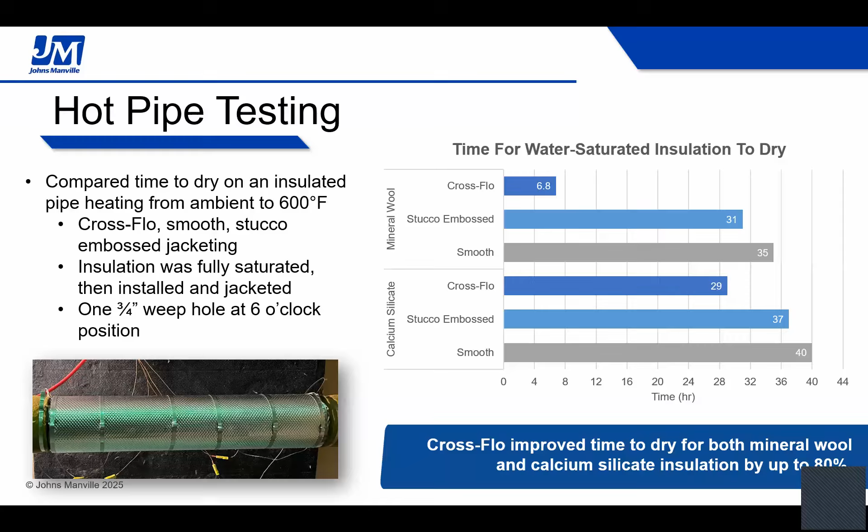So how long did it take that water soaked insulation to dry? This matters because if your system is constantly fighting to stabilize its processing temperature, that's a lot of wasted time and energy it could be using to do what you actually need it to do. As you can see, Cross-Flo still beats smooth and stucco embossed over mineral wool and calcium silicate. So that's going to save your system energy and resources.

So let's look at some of the Cross-Flo benefits for the contractor here. The install benefits of Cross-Flo are that embossing pattern. It's easier to align bands faster. It hides damage really well. It reduces friction, so you can slide the metal jacketing over itself and it doesn't scratch as well either. It helps to slide bands in place, and it installs and fabricates the same as our traditional jacketing, so you don't need extra tools to put this on your pipes. You just need tin snips and a box knife. Jack and I have done it a million times.

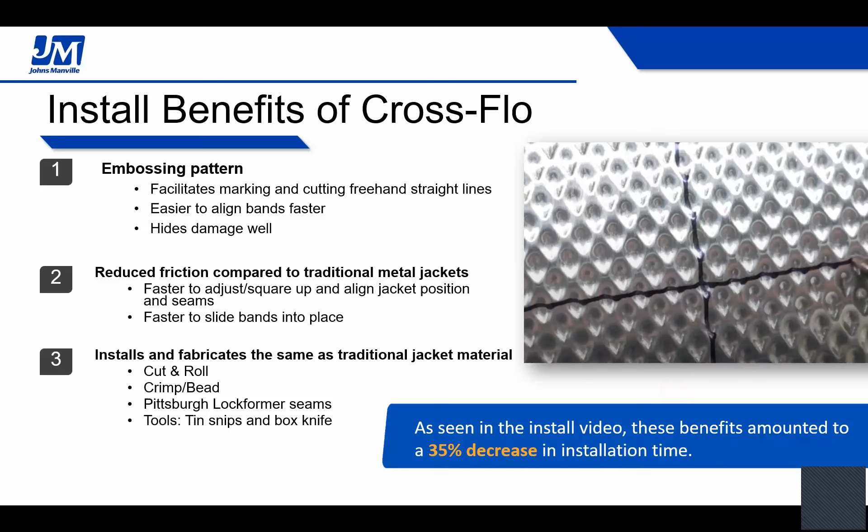I'm going to show you an install video that we did where we hired a third-party contractor. Kels, can you hit play on that?

Thank you. This gentleman is named Johnny Loredo. He's from Apache. We brought him in to insulate this pipe. The top is being insulated with Cross-Flo and the bottom is smooth. This is over calcium silicate. We did not give Johnny any measurements, nor did we let him save anything. We tried to control for as many variables as possible here.

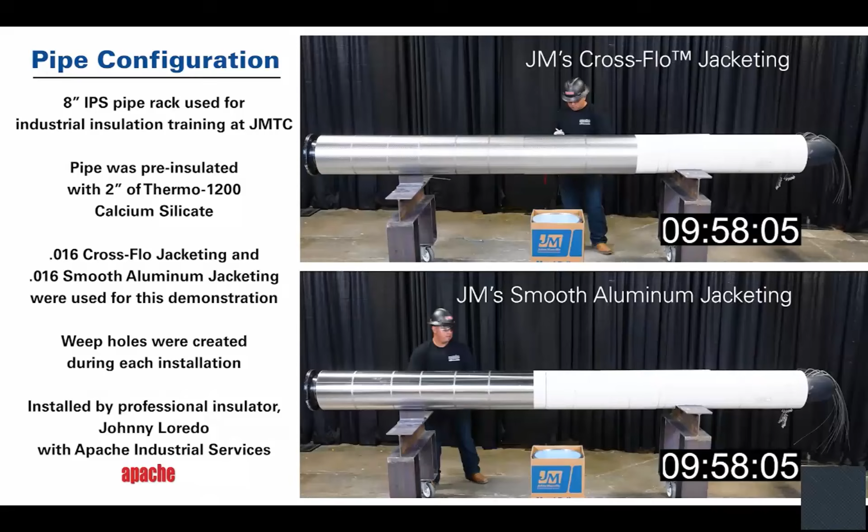He had to measure both times. He did install weep holes during the installation. As you can see here, he's going to run away with this Cross-Flo here, and it's going to beat the smooth. I'll just let this run through. Again, he was not allowed to save any measurements. He could not record anything. He had to start completely from scratch.

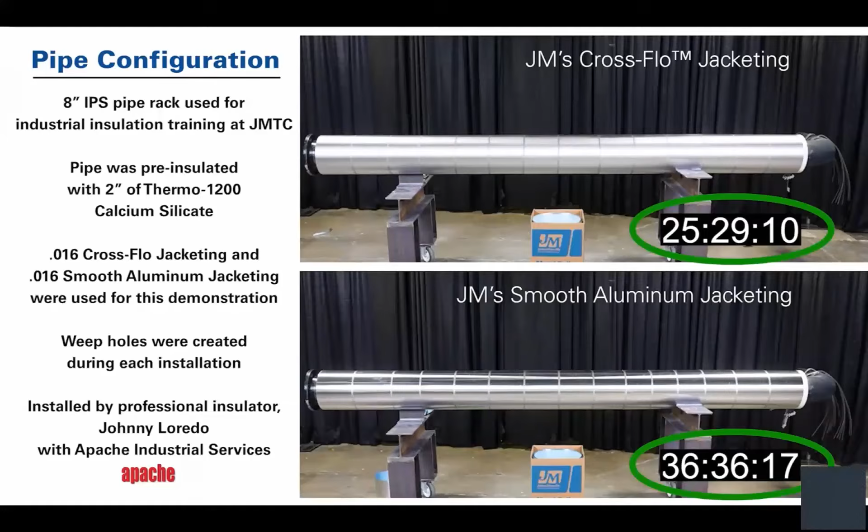So this result doesn't look crazy when you think about it, but this isn't that long of a pipe. If you had this on miles and miles of pipe and extrapolated this time, that's a big deal. That's a lot of labor and time that's going to save you if you're using Cross-Flo versus smooth in this scenario. On top of that, Johnny actually noticed a lot of things that we didn't notice when he first started, and those are some of those benefits that we talked about. He pointed these out - we didn't find these.

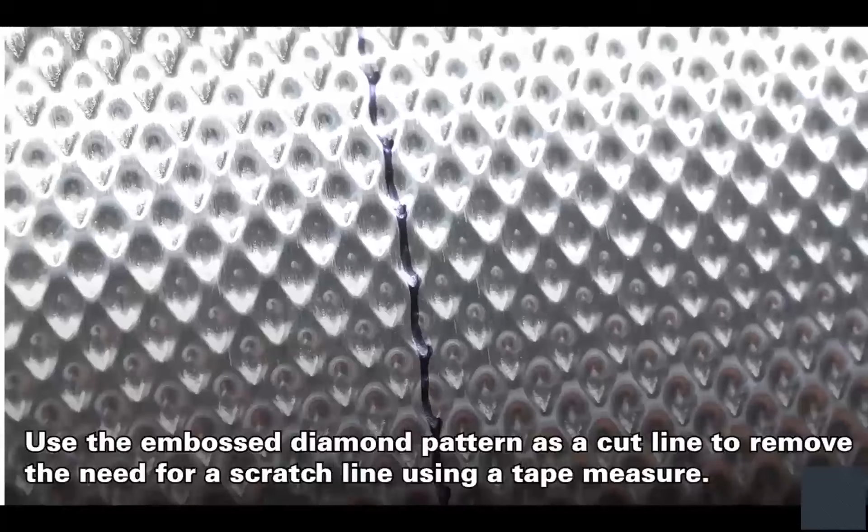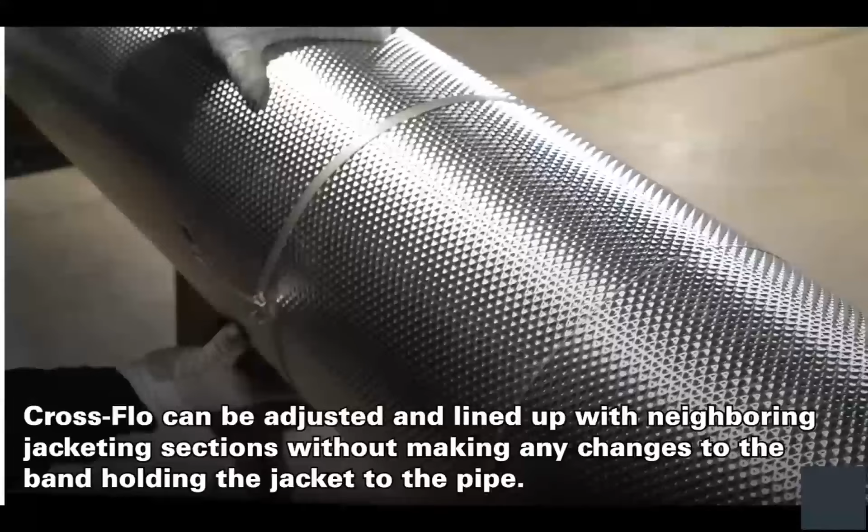Some of these - here's that diamond pattern, used as a cut line to remove the need for a scratch line. You can just go straight through, which he actually ended up doing. Here's that sliding that I was talking about - you can slide it over because it has those pathways that create a little extra room. It also locks in on itself, which we didn't realize. So those are benefits that he found that we didn't initially as well.

All right. Well, here we go. Sorry about that.

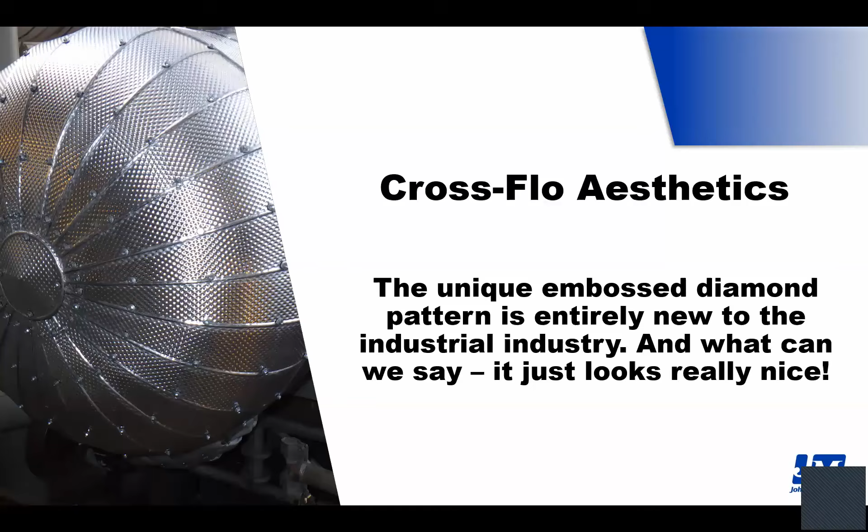Some of the aesthetics, we do have that embossed diamond pattern. It's entirely new to the industrial industry. Some customers just want to use Cross-Flo because it looks really nice.

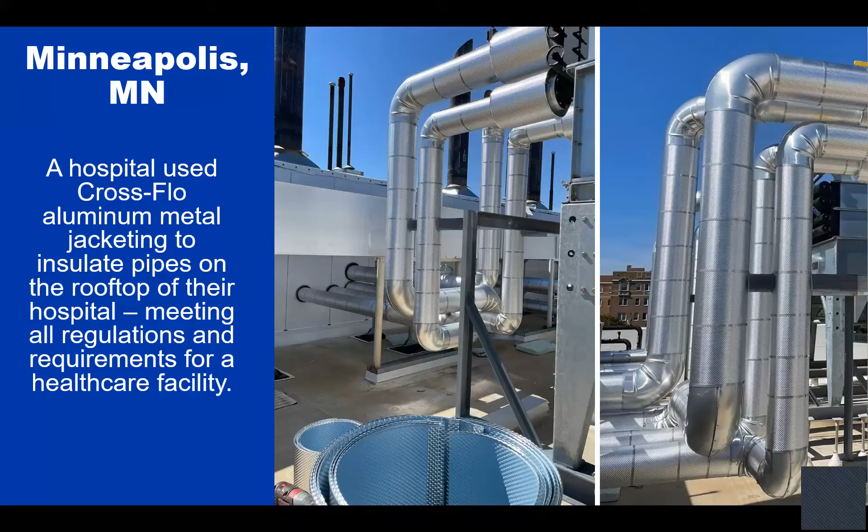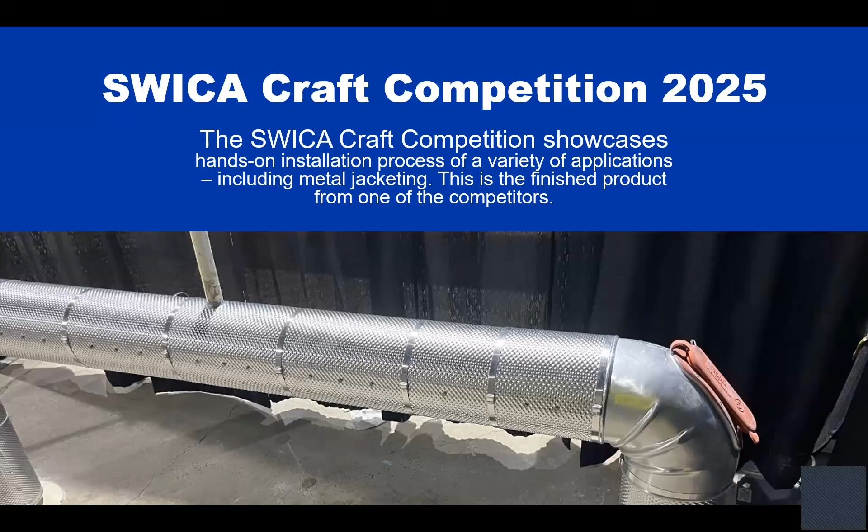We do recommend using weep holes in Cross-Flo at the low points to allow that water to travel and escape the system. We encourage every 3 to 9 feet at low points, 3/4 inch to 1.5 inch diameters. Do not pre-drill these in the shop if you don't have to. You can drill them on site, but do not do it once the jacketing is installed, or you will damage that underlying insulation. You can cut it with snips, but it leaves some burrs that can not look nice.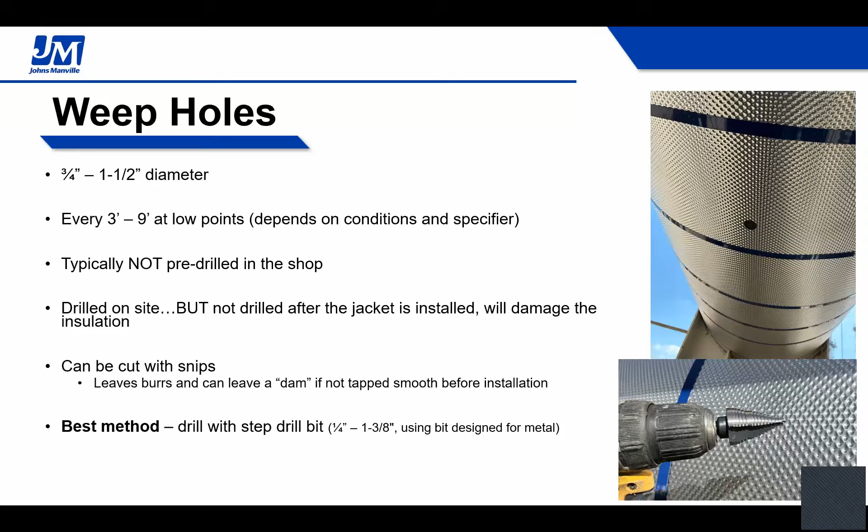The best method Jack and I have found is to use a step drill bit, which is not going to damage and leave those burrs.

Some of the key properties, I'm not going to name these all, but the top three are that thermal efficiency, which is that low K value, it's easy to fabricate and install, and it is closed cell, so it has good water resistance. It doesn't have absolute water resistance. It eventually will take on water, but it has good cell water resistance.

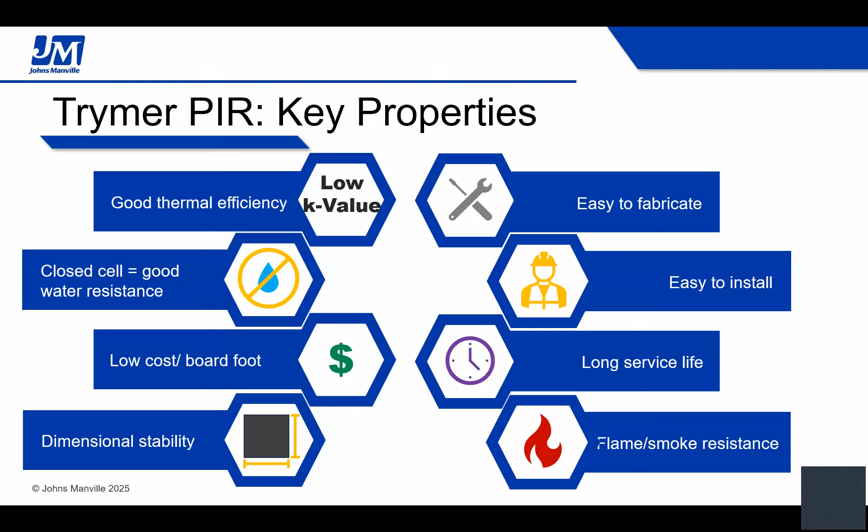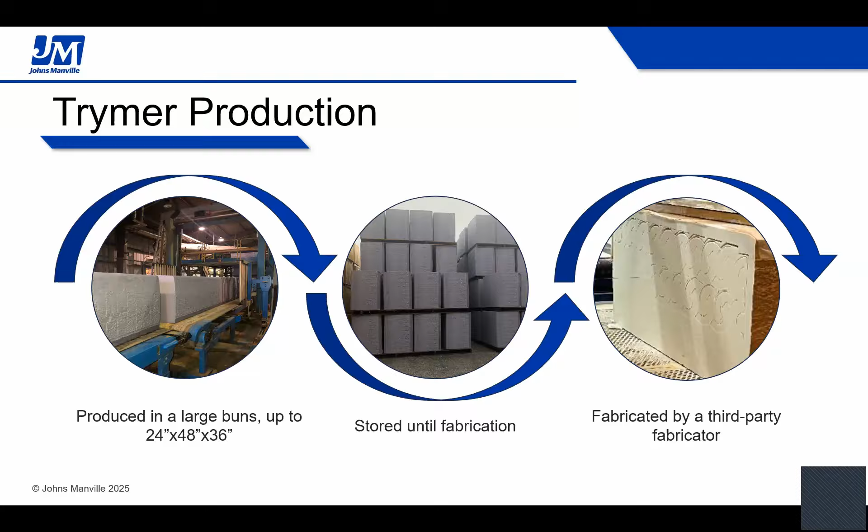So here's how we make this. It is produced in large buns on a singular line through a process that is quite chemically complicated, so I will not go into that. It is produced in these buns and then cut in sections. It is stored outside for a length of time for it to kind of cure and set. It gets what's called a skin on it. And then we sell these buns to our fabricator customers who will then use a cutting machine to create those pipe shapes that you see in this right picture, usually discarding the skin, and it just depends on the application what they're going to use this for.

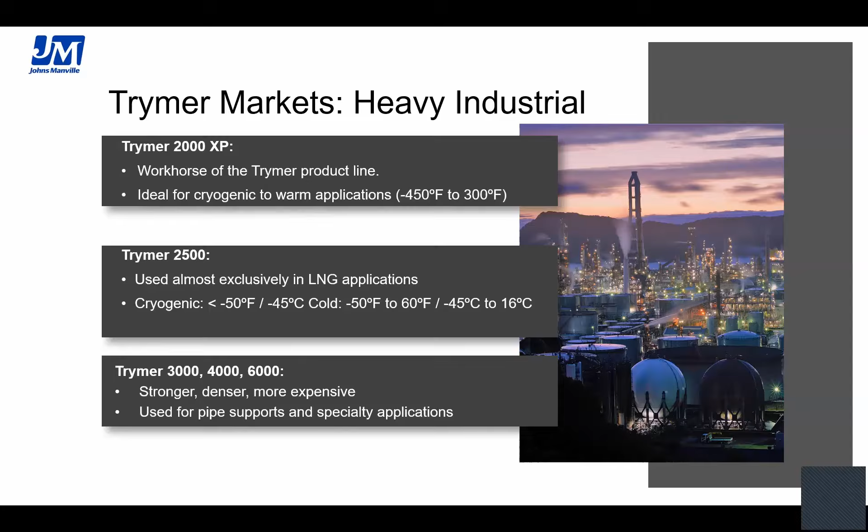So some of the markets for trimer, this one is heavy industrial. You want to use our 2000 or our 2500, which is the workhorse of our product line. It's ideal for cryogenic to warm applications. Our 2500 is used almost exclusively in LNG, or cryogenic applications. And then our 3000, 4000, and 6000 are aptly named because of their density. These are stronger, you're going to use these for pipe supports and specialty applications.

Next market is light industrial. This is mostly food and beverage manufacturing and storage. Examples of this would be like US Cold Storage, who owns large storage warehouses, Tyson Foods, ice cream companies, and so on and so forth.

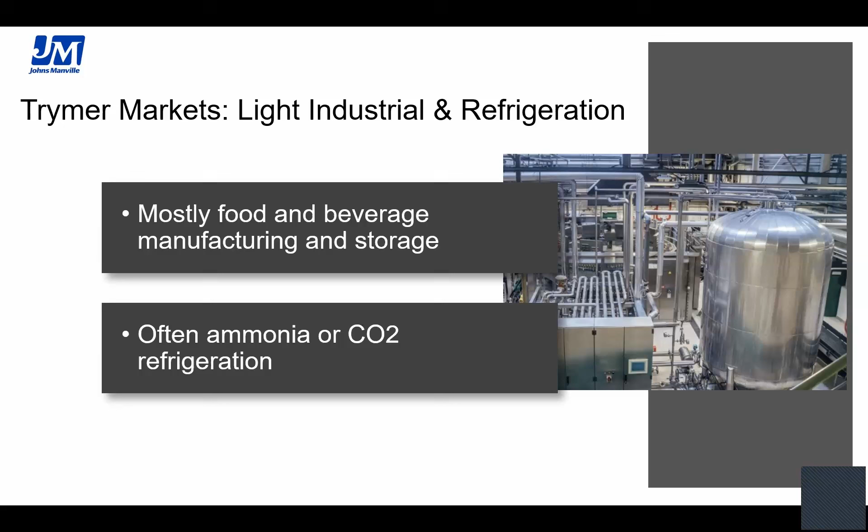So some of the limitations of Trymer, again, it is closed cell, but will eventually take on water. It does not have zero water absorption or permeability. That ASTM E84 requirement is applicable for Trymer 25/50 up to 1.5 inches. And then it does have mid-range compressive strength when compared to our other materials here.

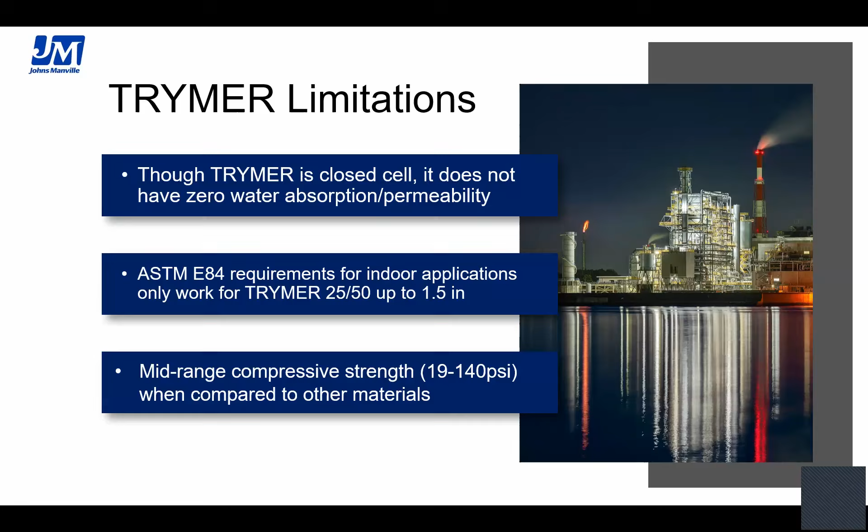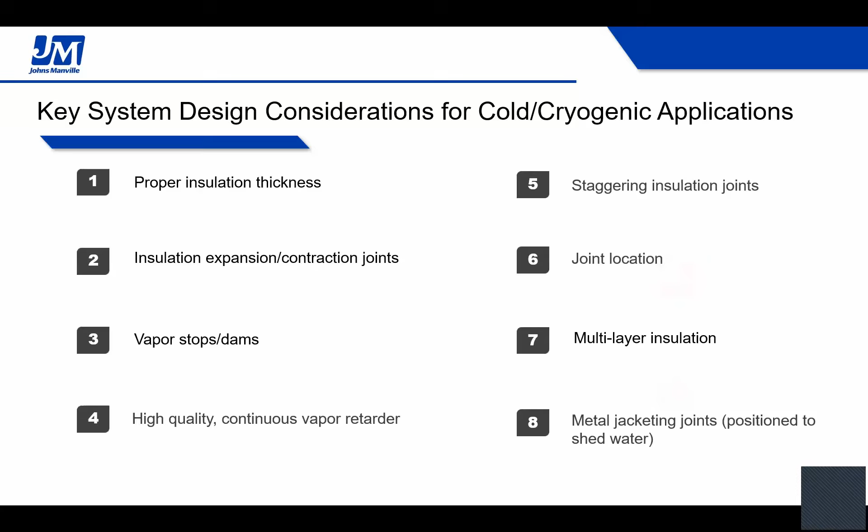So here's some of the key system designs for cold and cryogenic applications. I'm not going to go through all these, but it is again, in an effort similar to CUI mitigation, you want to tackle all of these. You don't just want to aim for one. When you have all of these, it kind of helps create that perfect system that'll give you time and use out of it.

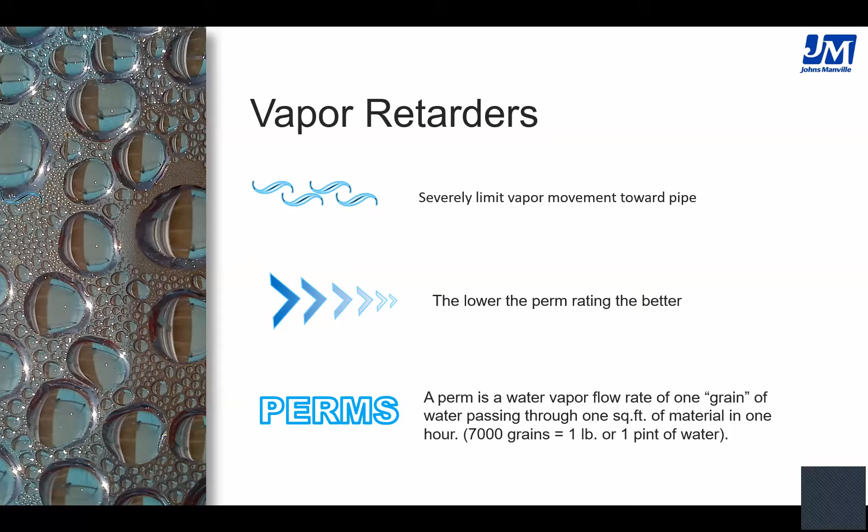So we're going to talk about vapor retarders. The selection of vapor retarder needs to be based on its permeance, which is perm for short. It is the rate at which water vapor passes through the vapor retarder. The purpose of this is to severely limit water vapor movement toward the pipe. The permeance is measured in units of perms, and a lower value or perm rating is better here.

So the point of this slide is that the minimum water vapor permeance required is less than or equal to 0.02. At colder temperatures, you're actually going to want to have equal to or less than 0.01.

Just watch out for ideal lab performance compared to actual real-world field performance. There are vapor retarder materials which might have a lab result of 0.01, but with no joints present and in a carefully controlled flat test geometry, which would actually not hold up in applicable cold applications in the real world due to that rugged environment and the presence of so many joints. So just be careful.

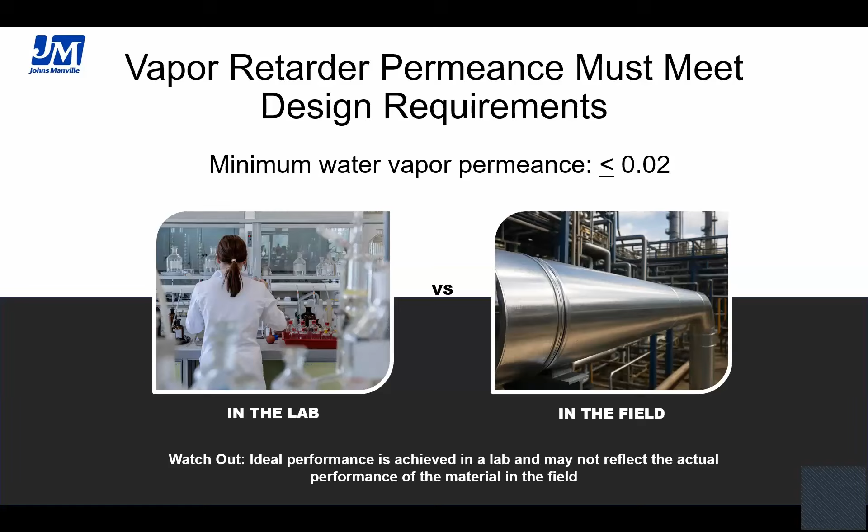So this is just an example of the service life of PIR. It's used around the world. When installed correctly, it offers 20 to 30 years of use in cold applications.

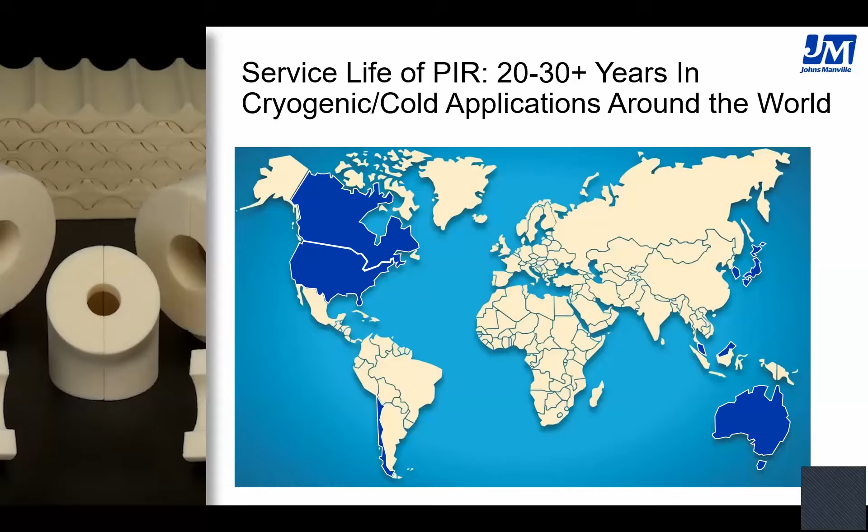I would encourage, we have a sales rep named Mel Rasco, who is the ultimate expert on Trymer. If you have any questions, I'm around, but if you can't reach me for whatever reason, Mel is a great resource as well. I know that was really fast, everyone, and I really appreciate it. It was a lot of information. I'm going to let Kelsey take back over here.